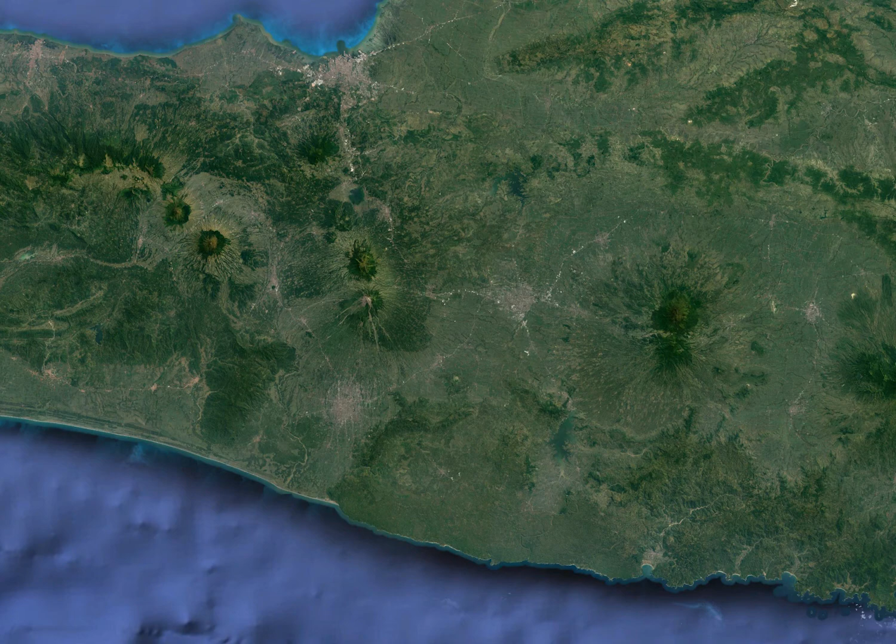Rather, the project taps into some of the fundamental challenges that planners in emerging economies are facing. If we look at Central Java, we see all the generic global urban components landing on the map - the seaports, the airports, the toll roads, etc. At the same time, Indonesia must find a way to balance development with preserving its natural, ecological and cultural landscapes.

This is a balance that's extremely difficult to achieve in rapidly growing economies. But there's another challenge. In a place like Indonesia, the traditional models of top-down planning, of centralized visions being rolled out from the capital to the furthest regions, seems to no longer work.

Instead, there's a dispersed, opportunistic urbanism taking place across the countryside, where these same global urban components, maybe at a smaller scale, are finding their way into the countryside. That type of urbanization is extremely hard to understand, map, wrap your head around, and it's even more difficult to guide and to plan for.

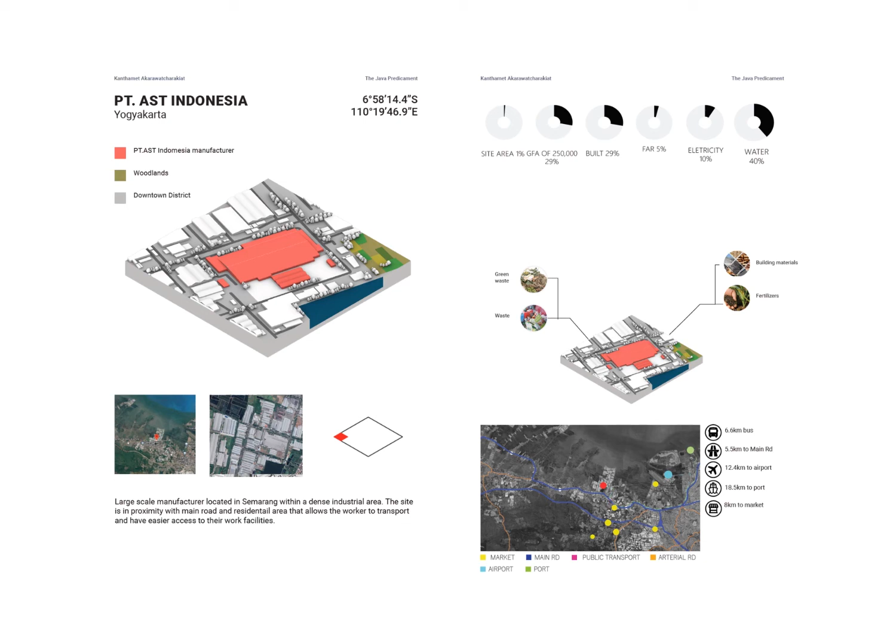So we ask students to first look at the micro level, to really map at an extremely local scale and consider what kind of processes are taking place there. That makes it very hard to conceive some sort of unified, comprehensive model.

But as we build our taxonomy of different solutions - a book of tactics and strategies that can respond to this type of dispersed growth and informal urbanization - there is some coherence. There seems to be a larger vision that can be applied to these types of environments.

The different projects relate to each other, tap into each other's findings, and work almost as a larger modular system that can be applied strategically and locally.

So the students ask a series of key questions through their projects. Is there a hybrid form of global, local, rural, metropolitan urbanism in Central Java? If so, what does it look like? How does it perform?

How will emergent forms of urbanization shape the future of Java? If these conditions do exist, how will they change, how will they grow, and how will they potentially become the predominant form of urbanism on the island? And what is the future of Java's rural-urban nexus?

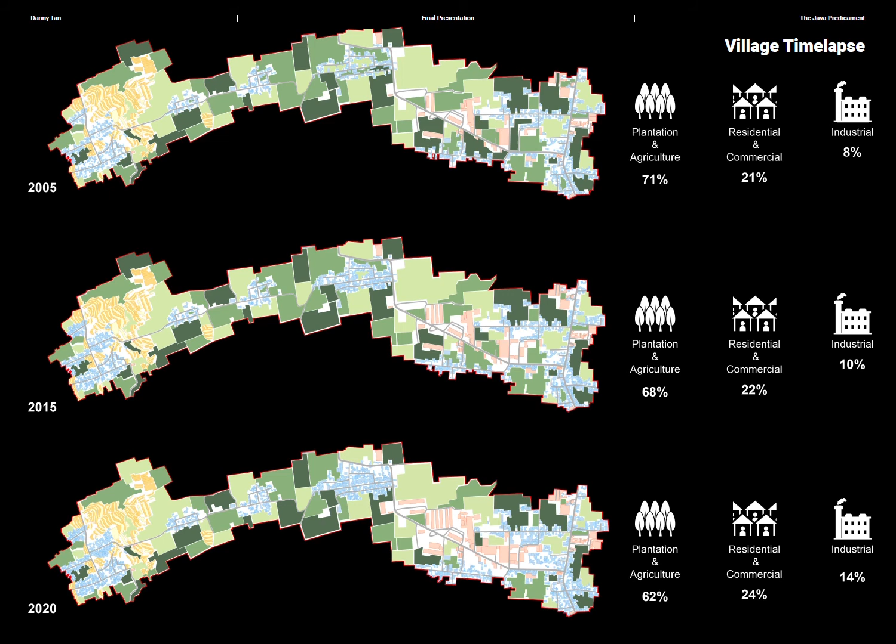In the 2045 master plan, the production sector should be formed as a dispersed production belt to adapt the local transportation network and to minimize the demolishing of the original site and maximize the developed area usage. The factory villages are identified through a series of time frames.

The factory village activates as the stretch network from major road to the inner road transportations. The stretch model delivers a diverse range of activities, and the hybrid mixed landscape forms the distribution channel of produced goods. The factory villages are constructed through different scales of transportation networks.

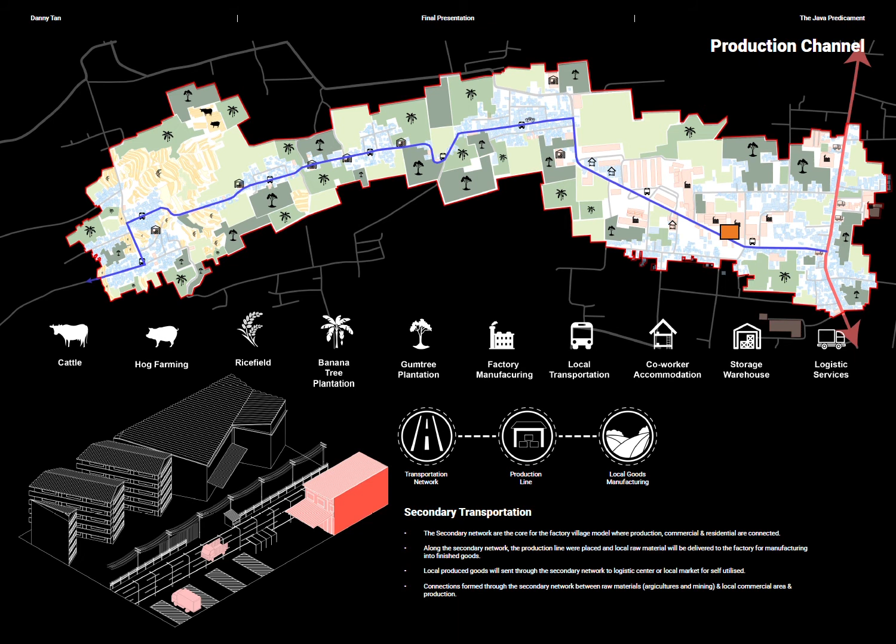Through the primary connectivities, connections were formed between the factory village and the regional networks. The secondary connectivities allow the goods to be distributed within the factory village model. Tertiary connectivity connects the local rural networks for assistance in smaller collection and distribution centers.

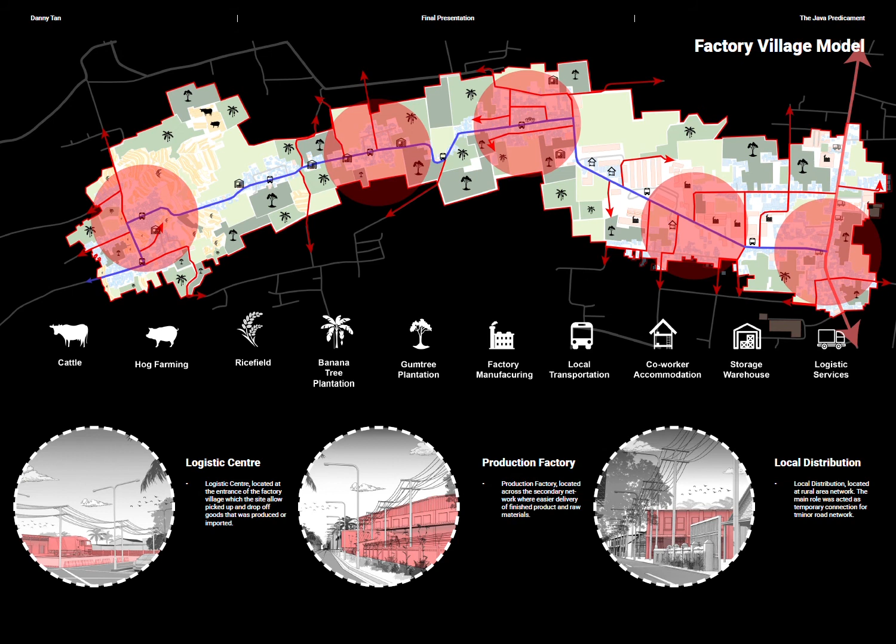Region areas will be formed based on existing local programs such as logistics centers, production factories, and local distribution centers. Logistics centers are located at the entrance of the factory village, allowing the site to pick up and drop off the goods produced throughout the factory village, and production factories are situated parallel to the secondary network for easier delivery of finished products and raw materials.

The local distribution centers are located at rural networks, where their main role acts as temporary connections of minor roads networks. As a conclusion, the factory village model is an ecology system that strives to achieve commercial activation through the dispersed methodologies of a production belt.

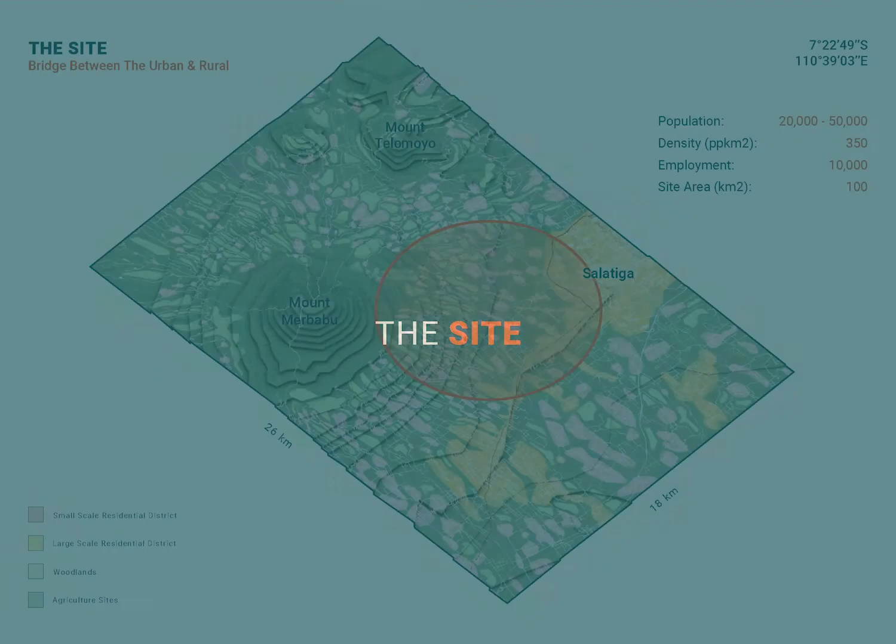This project looks to interrogate the current solid waste management and treatment industry in Indonesia, identifying its issues and proposing that the future of urbanism in Central Java revolves around waste management as its focal point, where the end is also the beginning of a city.

Waste management should be celebrated instead of being disregarded in the revitalization of the desakotas, coexisting with urban infrastructure such as public transport lines, bike lanes, and major roads to bring in additional exposure from other districts to facilitate urban growth within rural areas.

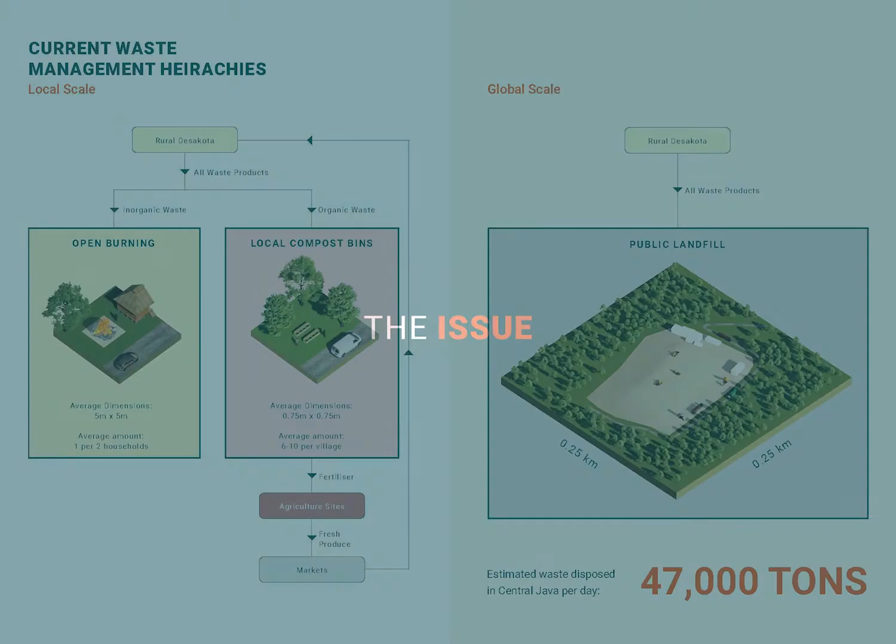I've also been fascinated by the changing of the primary paradigm of Central Java, questioning myself as to how development might happen if the driver of urban planning is through proper disposal of waste, as I am not just speculating on the project from an economical standpoint, but also very specifically on waste management itself.

This would mean that the future of Central Java is to be more community-driven and have a stronger reliance on the residents themselves, to deal with their own waste properly, with the incorporation of district waste management signifying patterns of growth for the future of these desakotas. This would ensure that the entire process is localized and incorporated into the circular economy of the district, establishing a

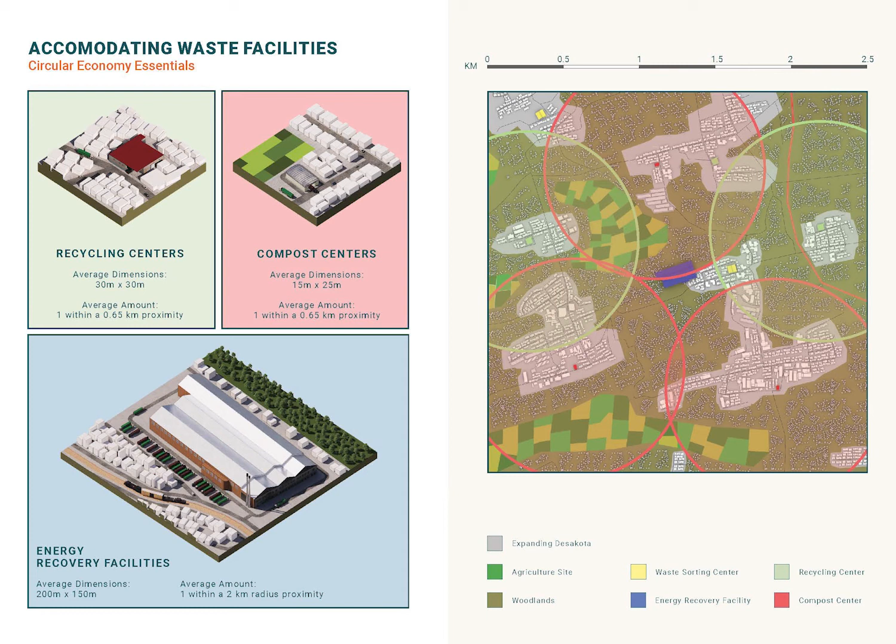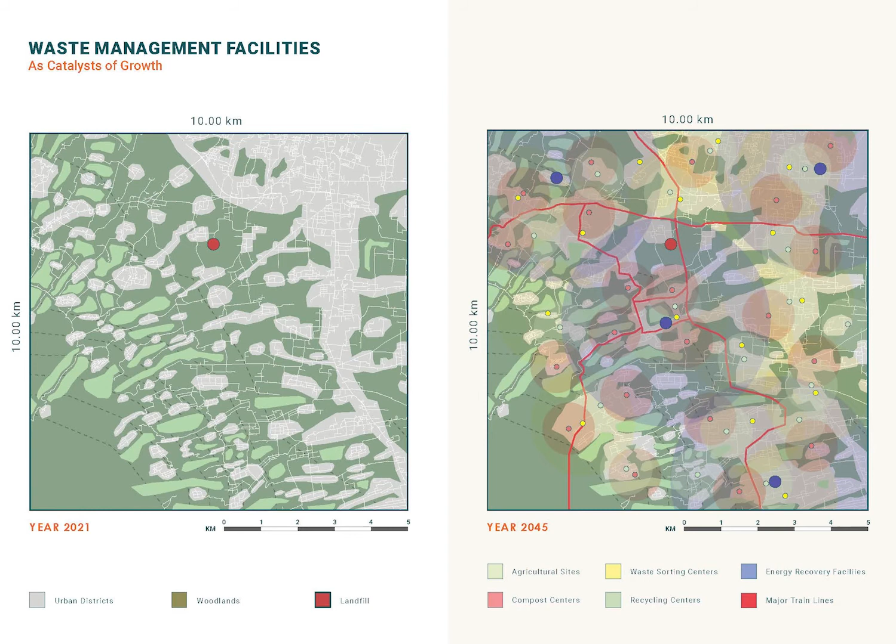continual use of resources and eliminating waste. This proposition is not just meant to revolutionize Central Java, but it could also be instilled in the urban planning of other parts of Southeast Asia or even potentially the rest of the world, starting from the installation of a waste sorting center as a transition zone that would cause a ripple effect for the implementation of other urban amenities, such as additional agriculture and farmlands, industrial and commercial districts emerging around these facilities as well, signifying an increase in efficiency for the district through close proximity and also leading to an increase in job opportunities through the consolidation of these economic hubs, creating a sustainable community that can flourish and become the future of neighborhood planning.

To virtual metropolis. My project looks to investigate the potential of growth due to information and technology in Central Java for 2045. Analyzing these sites from Central Java and making observations from the spatial conditions and consumption patterns, use of internet is seen as a pattern of connecting these virtually. It is estimated there will be 50 million new internet users in Indonesia every 5 years. Indonesia is one of the countries with the largest social media users in the world. It has been seen that with COVID-19 happening, there has been a significant increase in online activities, purchases to online education, and getting medical help.

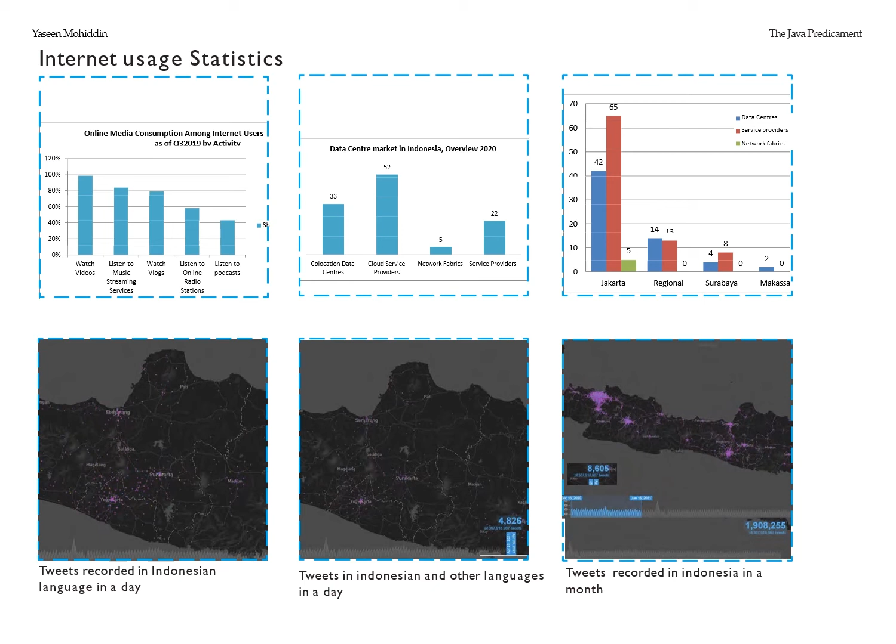I'm proposing that IT would be the facilitator in development of rural population and make them self-sufficient and independent of the urban core. Experimenting telemarketing business as one of the scenarios to be the catalyst in the development of a selected village. The virtual infrastructure would enable the desakotas to be self-sustained, and the next 25 years could see technology facilitate the growth and drive urbanization of these villages in place. Since it has been seen that infrastructure in itself does not dictate growth, the information technology, by making the services more accessible from their homes, can enable growth without the use of physical infrastructure in these circumstances.

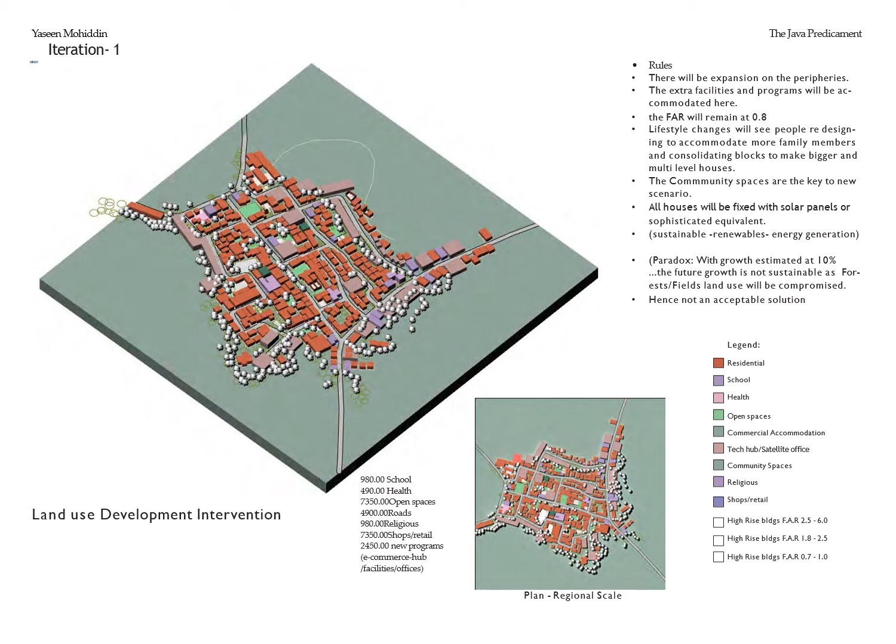The trend brought about by COVID-19 for a shift towards decentralization can also see migrants return, and the distinct entrepreneurial skills can lead to the establishment of online businesses and create models for other villages to follow. Indonesia's e-commerce sector is already growing. Success stories in Taobao villages of China suggest that digital technologies can contribute to inclusive growth. They can lower the required skill threshold, allowing individuals, including the less educated, to participate in e-commerce and earn more. Schools and community centers can also act as agencies or incubators to manage this at larger scale.

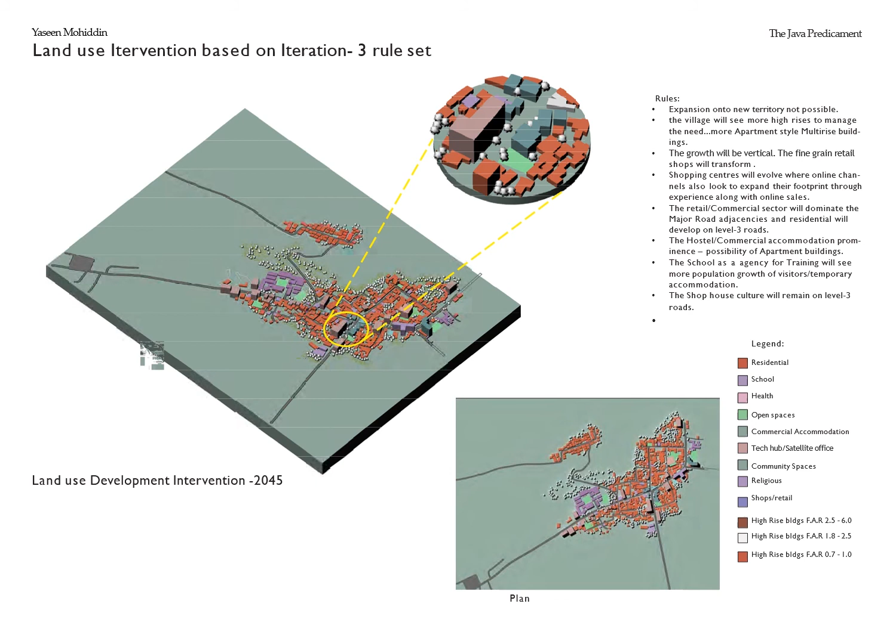The experimentation of these different scenarios and options reinforce the proposal. The development in terms of shift in programs to shift in typologies has been projected. The development could maintain the village culture and hybrid of fine-grained existing scale built form along with clusters of new multi-level buildings. Biophilic facades, eco-friendly sustainable homes, ground floor retail, and more community gathering spaces will not only enhance a sense of community, but can be viewed as a prototype for other villages to follow.

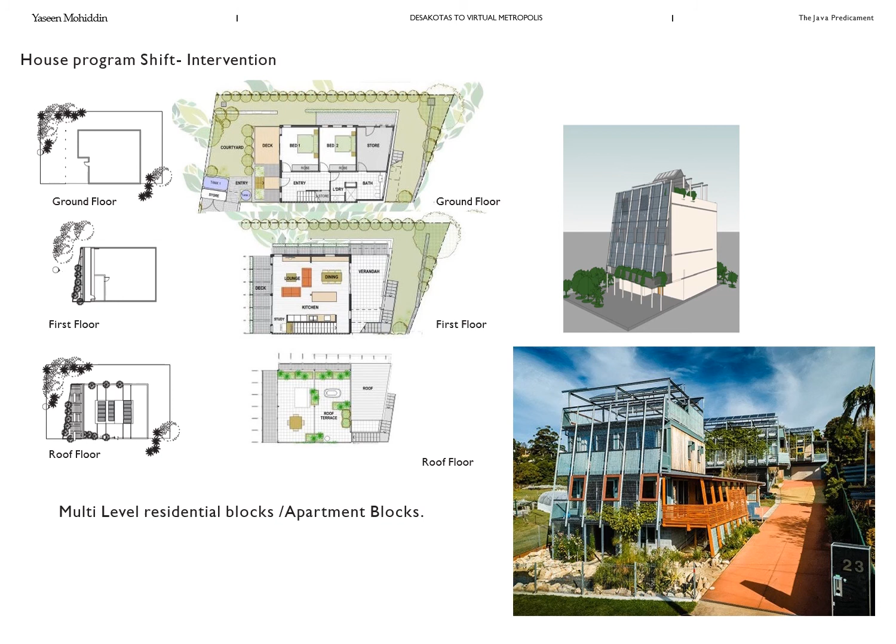The desakotas as a good unit of urbanism, closely connected to the community and virtually connected to the whole world. These also being self-sufficient with jobs, entertainment, online services, and shopping, etc., and independent of the urban centers for economic reasons, it has every potential to transform into a virtual metropolis.

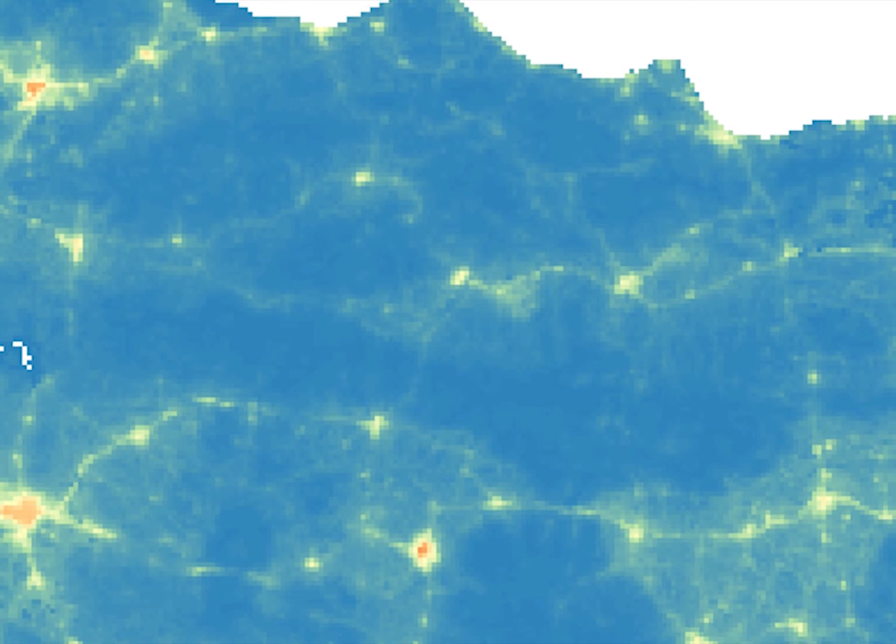The notion of urban catalyst refers to the new element that can promote urban changes and accelerate or change the speed of urban development and constructions. That is to say, through the intervention of certain elements, a certain chain reaction can be triggered to promote the maturity of objective conditions for urban constructions, so as to promote the sustainable and gradual development of the city according

to the people's will. In the development process of Central Java cities, excessive accumulation leads to environmental degradation, traffic congestion, and other problems, which makes the population and other factors tend to develop in suburbs or small towns with better conditions or more abandoned spaces. This is the anti-urbanization background of Central Java.

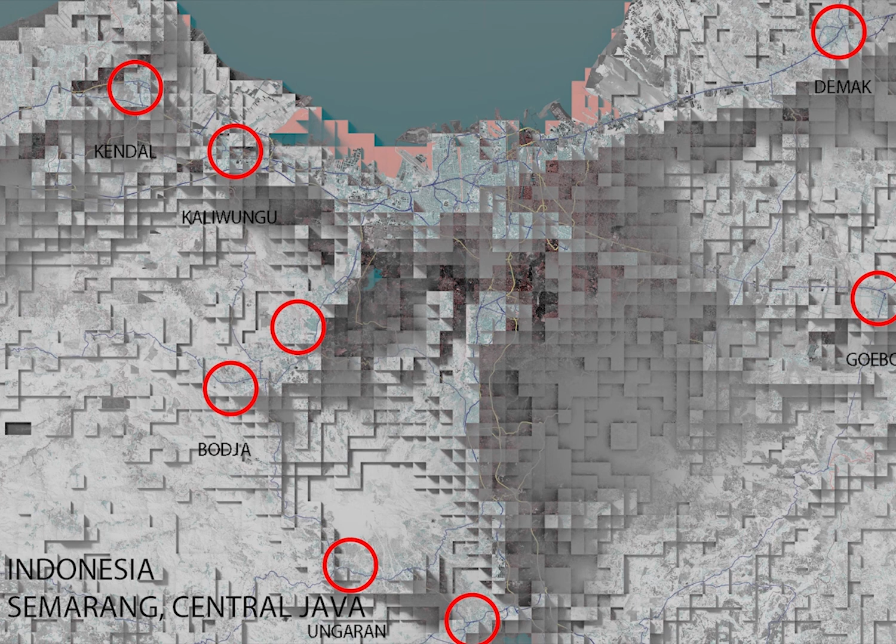This is a summary of one of the big cities in Central Java. If you cover the population density map with it, you will get the following results. Due to the terrain, traffic, and other factors, the population density within each red circle is higher than that of surrounding areas. If we understand it from a different angle, it will be much more clear. And in every high density population point, there is a system that can digest most of the needs of the public, and it can form a closed loop of self-supply chain.

When we zoom into one of the high density population points, after 25 years the population density will reach 2.2 times, and the function of a market will become limited and difficult to control.

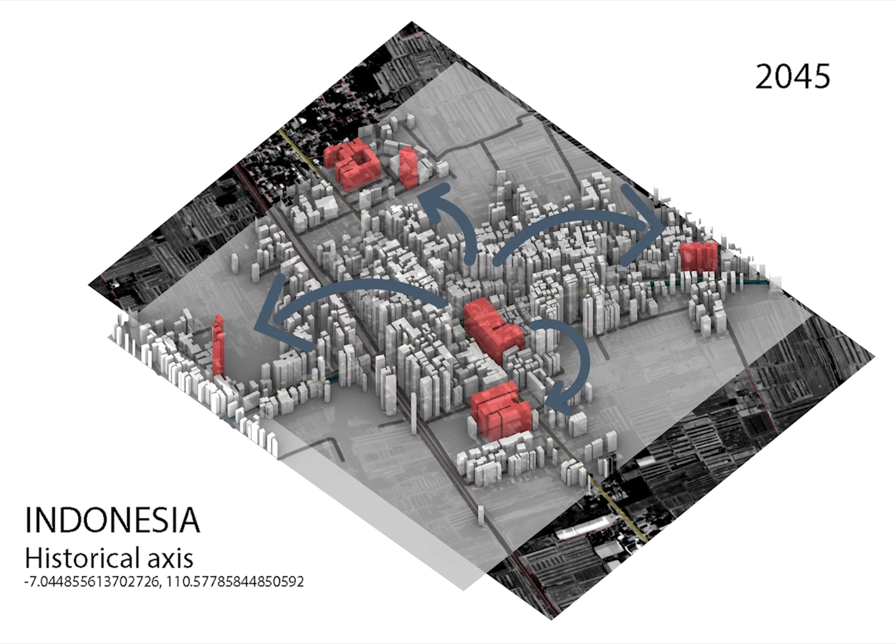As a solution, I hope to break up the rules of regional center and get such results. Each red area serves as one of the catalysts in the area. The proposal is to stimulate and drive the construction of the city and promote sustainable, gradual development of urban structures through such urban catalysts.

It is not the ultimate product. It is the beginning of a series of products which will stimulate and guide the development of many subsequent projects.

Each element catalyzes definitive action of protection from risk and disasters, generates economy, enables intangible boundaries which form one community, and come together to celebrate in 2045, with economy booming to 4 times through fruit tree plantation with 10 trees per family.

The increase in tree cover prevents or obstructs the disaster from volcano, increases groundwater table, reduces the effect of siltation, and protects the land. The communities of Central Java have proven that increased tree cover can surge rice harvest to 3 cycles per year as compared to 1 harvest.

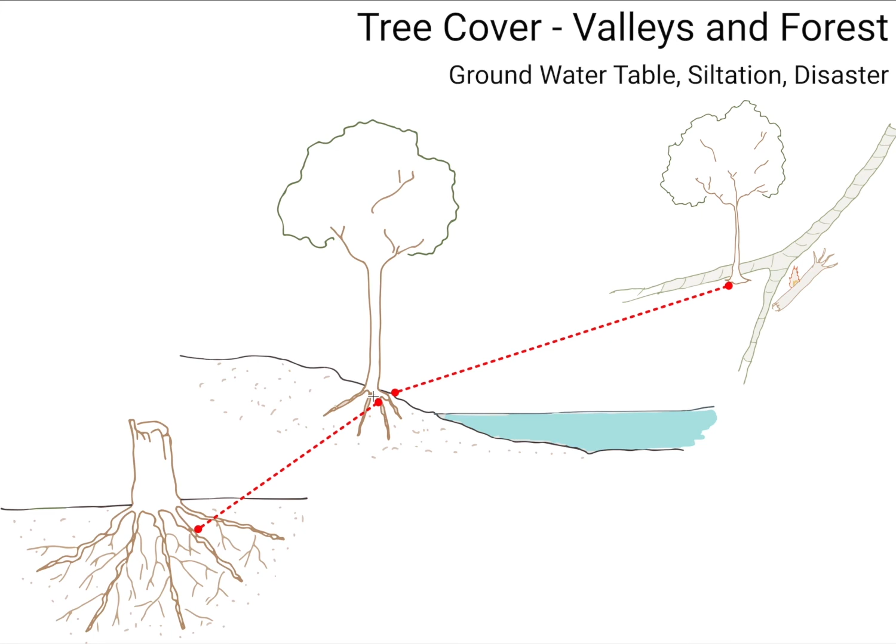The risk and disaster helps understand the existence of each element in the system. The analysis at macroscale aids the understanding of interrelation among local programs and consolidation of communities, which enable densification in initiating local connection and growth.

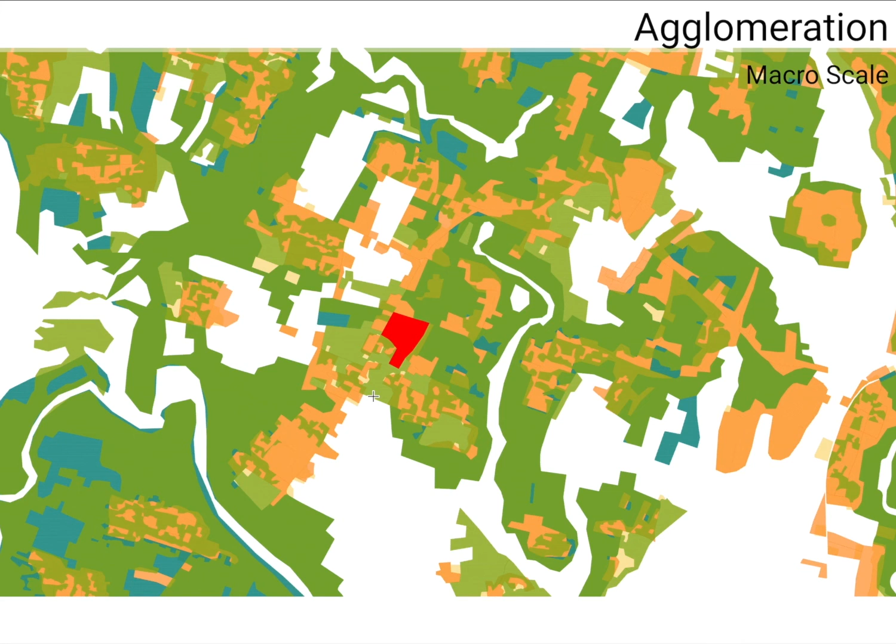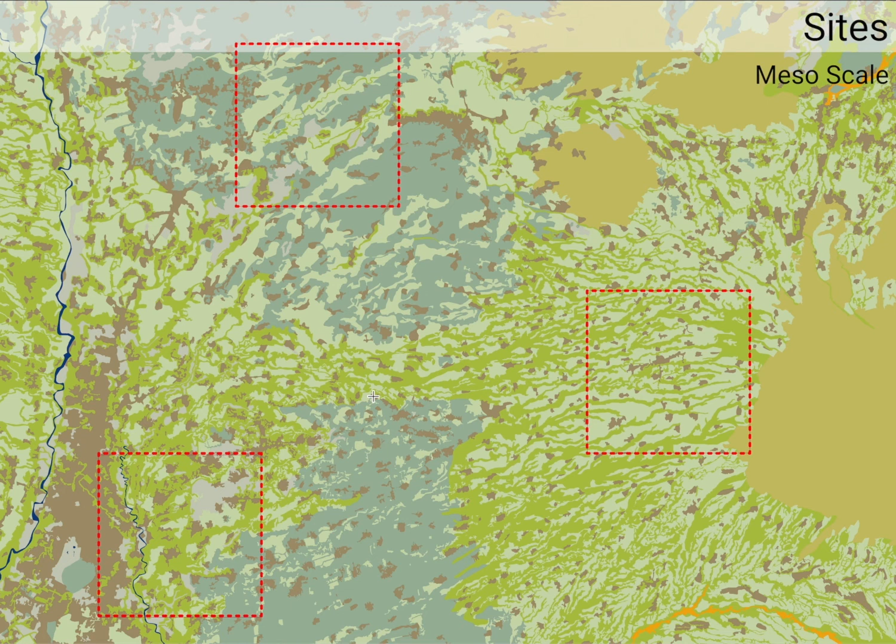At macroscale, the negotiations that take place in the hybrid landscape allow densified communities to agglomerate, sharing their relationship with tree cover in green and farms in white as principal source of economy. The analysis formed the basis of application at mesoscale to ensure that the system is not intervened. On the contrary, it further enhances the outcome while strengthening sustenance and resilience.

Site 1 is close to the volcano and utilizes the valley system principally. Site 2 is close to Magelang, the rural-urban fabric. Site 3 has a narrow and dry stream which needs to be converted to a valley.

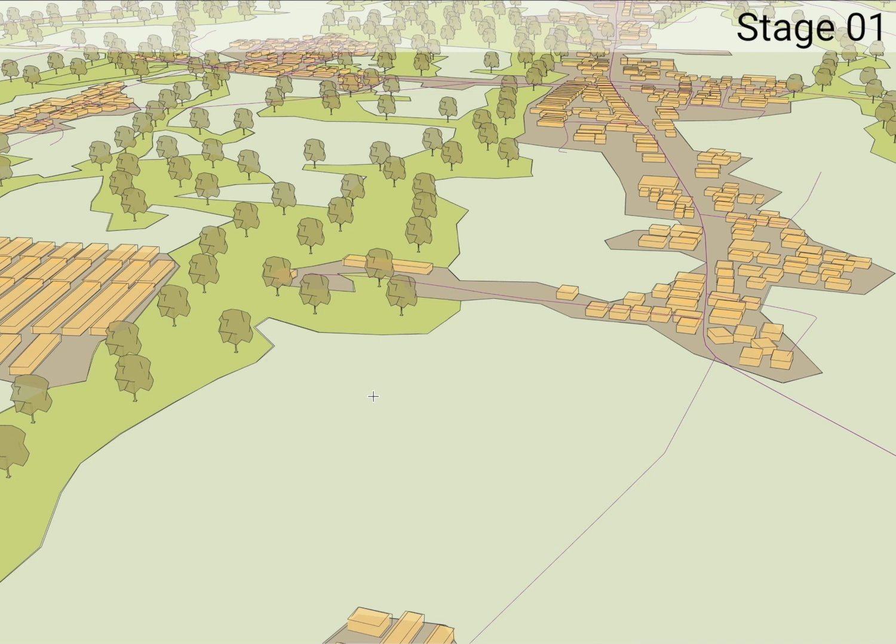Development stages for the sites can be understood in 4 progressions, in which stage 1 is the existing scenario of fragmented negotiations; stage 2, the meso scale implication, a 45% increase in tree cover to renegotiate economic program; stage 3, corridors of growth, densification of nearby communities as understanding developed from macro scale; stage 4, consolidation of land area by increasing volume while accounting for the lost trees in corridors of growth.

This has been applied at all 3 sites, 2045 as per fragmented negotiations. Thank you.

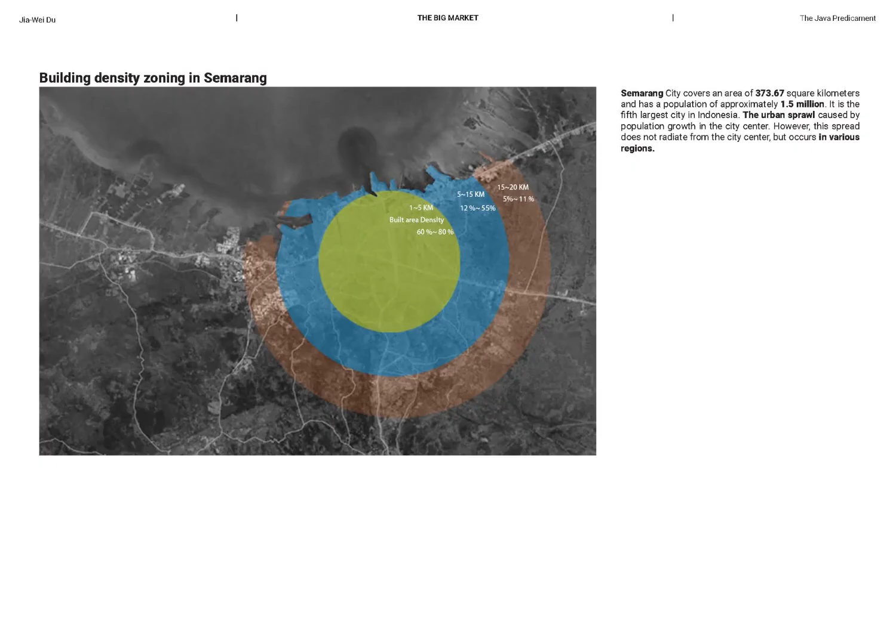Hi, I'm Jia-Wei Du. My project is the Big Market 2045. A large additional market will be built around the Semarang city to slow down the city sprawl. The phenomena of spreading around the city, mostly near university or industrial areas—these infrastructures affect the urban fringe and gradually create several new communities.

So the urban sprawl does not come from the city center, but occurs on the border of different administrative regions. I searched some low density areas to create an edge between districts. This area, because of the establishment of the industrial area, the nearby residential area gradually expanded and became a new community.

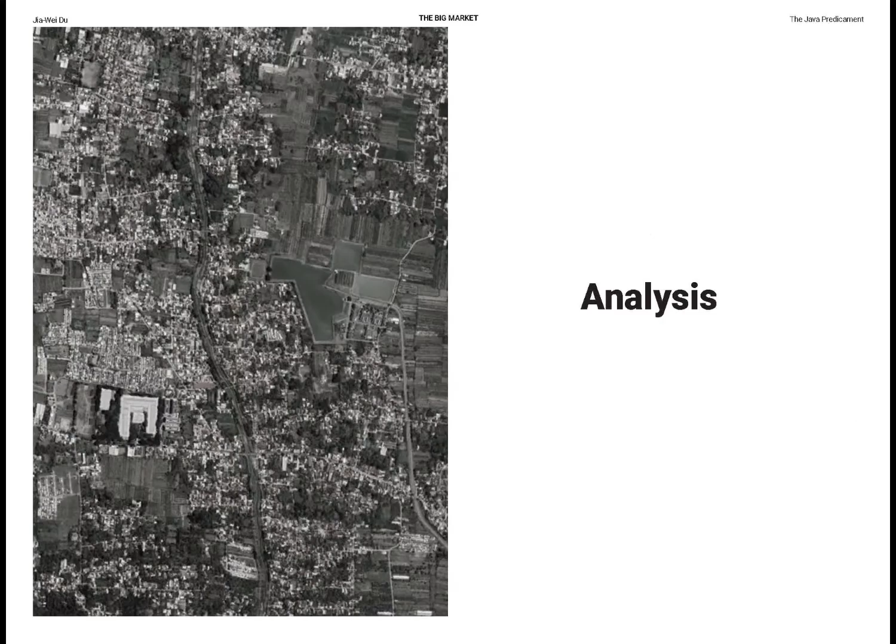In 2015, there was a traditional market here. I think this is an opportunity if the traditional market continues to expand. What impact will that have?

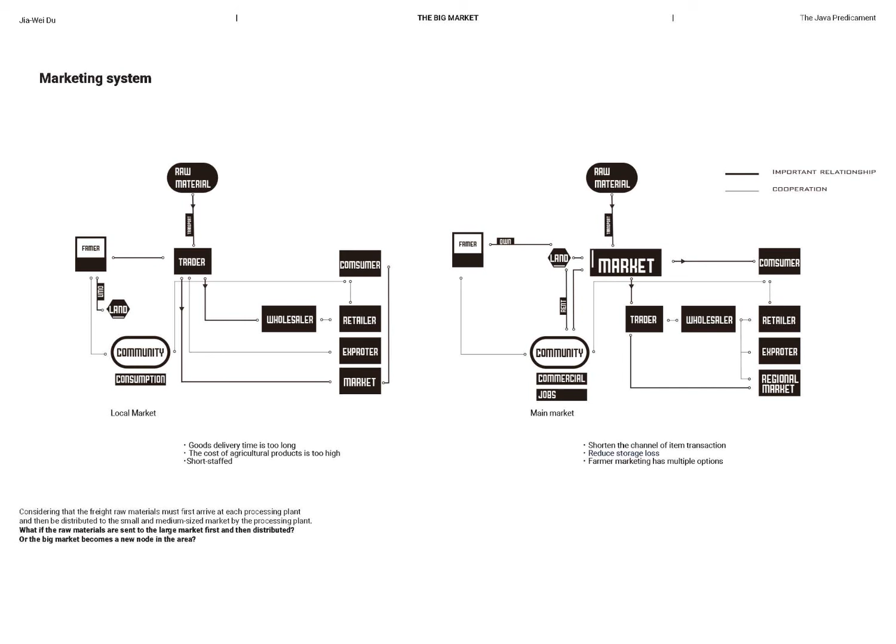Compared with the traditional marketing system, in the local market most imported goods are transported and sold to the market by traders. After becoming a central market, the market can directly collect and store raw material and goods. This can shorten the channel of goods transportation for the community. It also brings a lot of work and consumption opportunities.

Assuming the number of merchants in 2045 is more than 6,500 due to increasing demand, the agricultural land near the collection and storage center can conveniently provide goods and material to the traditional markets in the urban area.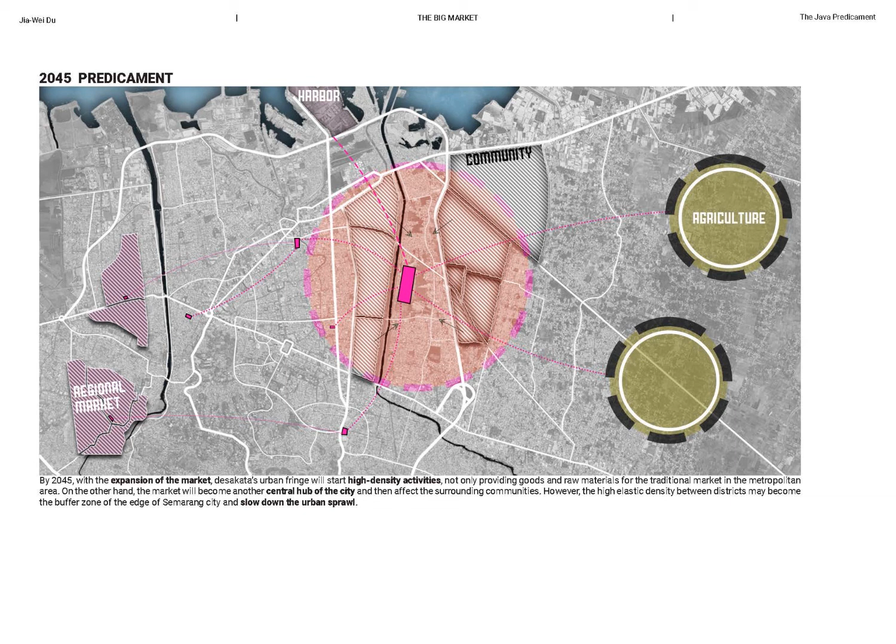In 2045, the market will become another central hub of the city, affecting surrounding communities. However, the higher density between regions may become the buffer zone on the edge of Semarang city.

Central Java remains in increasing urban-rural disparities. Due to Indonesia's own policies, which tend to pay more attention to industrial development instead of agricultural development, this area faces a predicament that the development of rural areas is relatively backward.

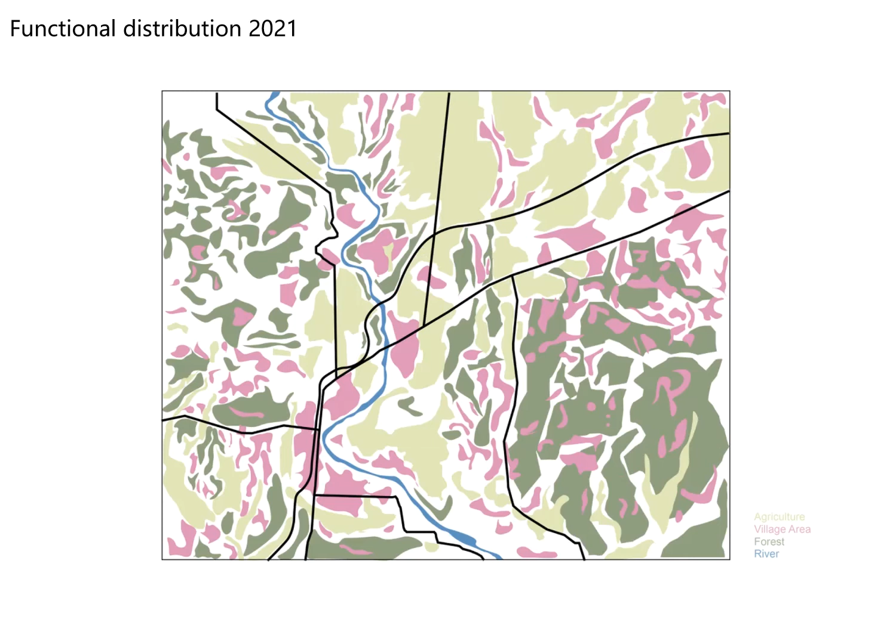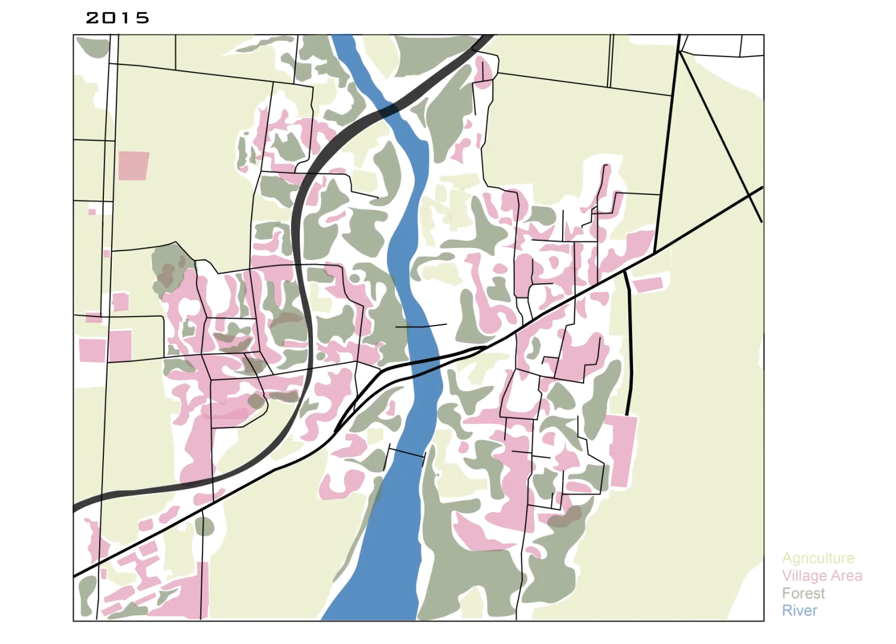Besides, the Indonesian government's policy of encouraging decentralized planning has contributed to the current urban function distribution model, which enables people to get all the functional needs of daily life in a very small range. However, it relatively affects the motion of the entire regional economic and industrial chain. As a result, there are few locally specific industrial chains, and crops are not only unable to be exported, but even need to be acquired through imports.

This predicament and problems exist along with opportunities. With its good natural environment and abundant labor force because of its large population, Central Java still has great potential for agricultural development.

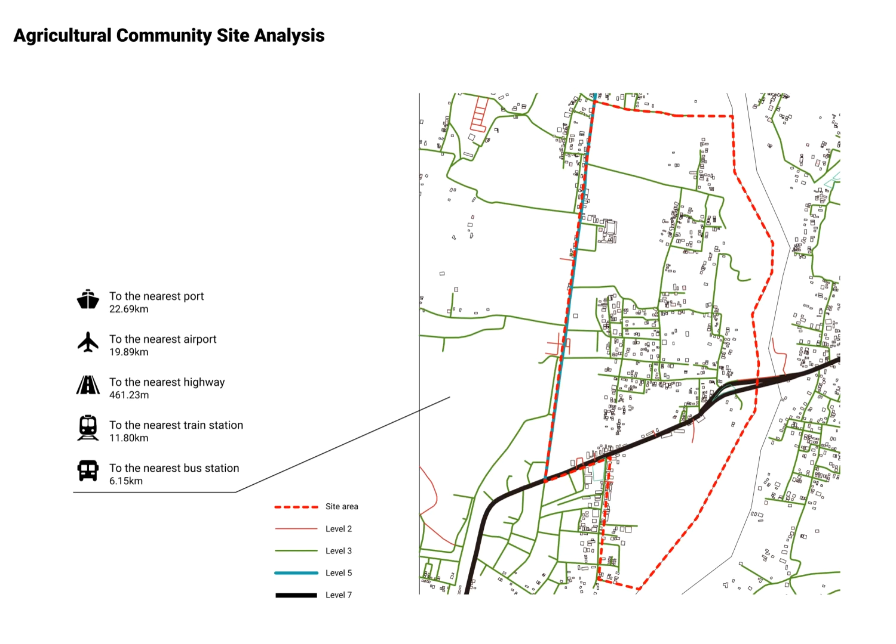Finally, we selected two small villages with a river located at the southwestern area of Yogyakarta as our experimental area and implemented our idea. We regarded the whole village as a system with different functional hubs and integrated small farmland into large farms. Through overall regulation and control, planting and harvest could be carried out in a unified way.

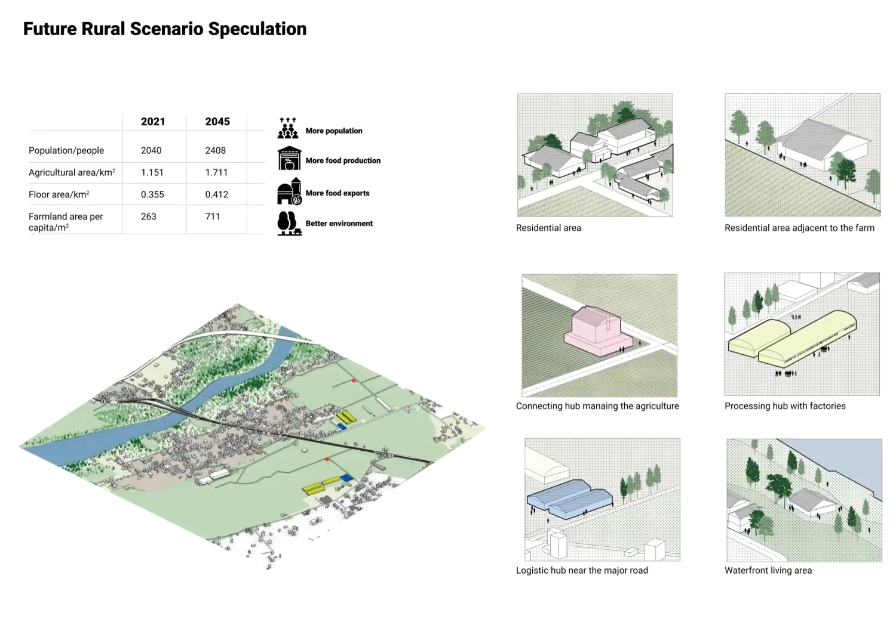This system also includes the management and reuse of waste and wastewater, so as to lay the foundation for the sustainable development of this region in the future.

Urban agriculture can be reimagined in 2045 in Java, where it is inspired by the coexistence of desakota and urbanization that is currently happening in Java. With rapid urbanization, the villages of desakota are decreasing, and the food supply chains are becoming longer, causing unsustainable planning.

However, with the implementation of sustainable farmland in potential urbanized areas, this helps stimulate self-sufficiency for farmers and maintain the villages of desakota through Java. Throughout the speculation and comparison of local and global agricultural typologies, these typologies have been expanded into further potential hybrid conditions for urban agriculture with strategies from production, food hub, and creating market and trade.

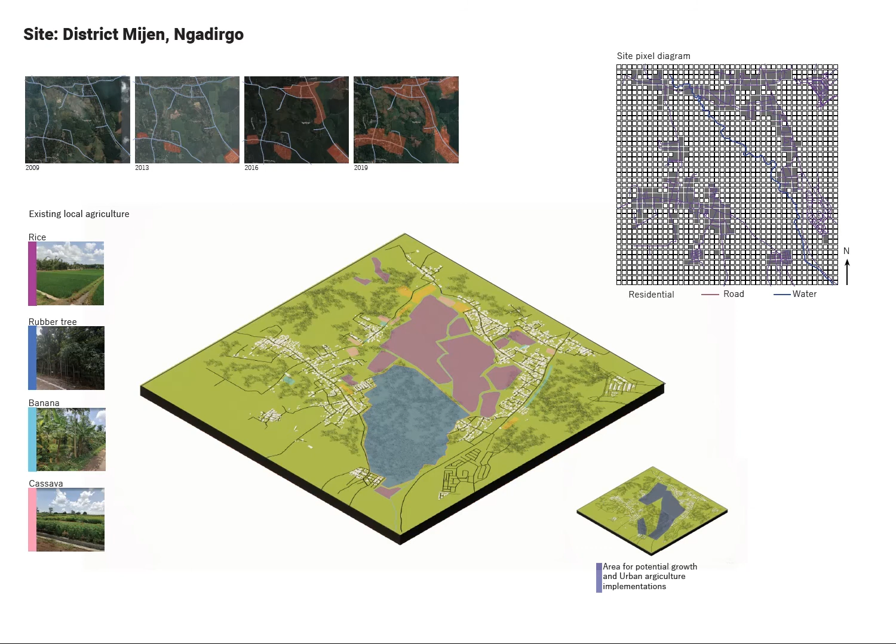The chosen site is Ngadirgo in Mijen district, the main area for agricultural production that is close to Semarang city. Due to its low land price and accessibility to irrigation, this site has potential to develop the area into urban agriculture, maintaining the desakota before urbanization takes over.

First strategy: the idea of production is to diversify crops to create biodiversity within the area through a land configuration of 2 acres that will create self-sufficient farming. This land configuration is also catered towards urbanization of growing population and to create housing for farmers. This implementation of self-sustained farmland won't disturb the existing agricultural context.

Next, food hub. The food hub acts as a processing hub and aims to stimulate the local economy and provide jobs for local people by pulling small and medium-sized farmers together so they can pool their products to fuel larger demand. This will help farmers cut away the middleman problem.

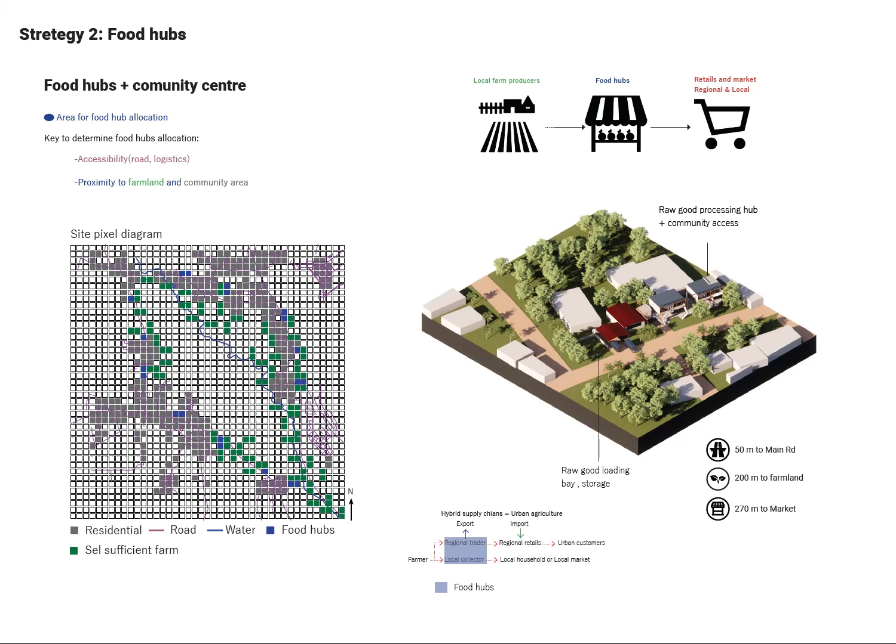Next is market and trade. Market and trade will be prioritized in urbanized areas that are accessible for locals.

So what will happen in 2045? The allocation of self-sustained farmland will act as a buffer to protect the existing farmland from urbanization, which will prioritize the existing farmland to be the production area for the community, making food more accessible and affordable within the area. The configuration of this will create biodiversity in the context too.

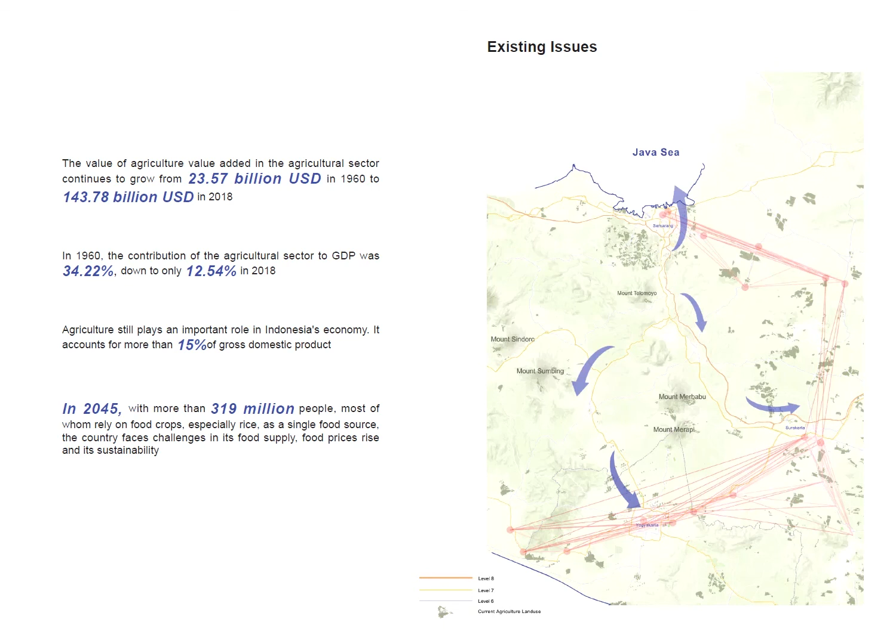The existing issues in general are decrease of rice fields, land with no farmers, low agricultural technology, and poor infrastructure. My proposal basically aims at creating developed centers in productive or potential productive rural areas and maybe revolutionizing rural areas.

Connecting them together to form their own towns, like agricultural-based small towns. The centers are to become the focal points for the collection, processing, and distribution of agricultural inputs of the surrounding rural areas. The whole proposal is based on the ecosystem to develop further.

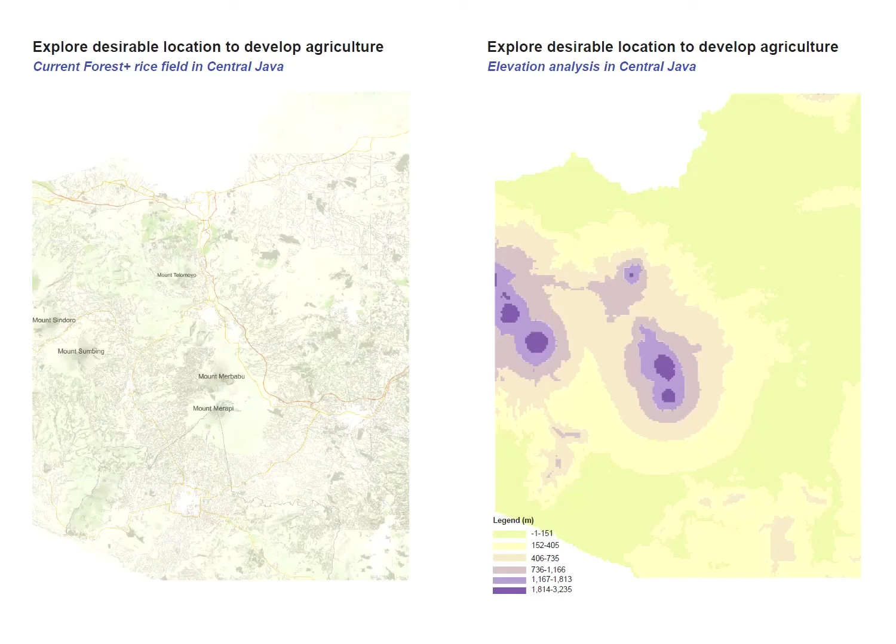The next step is to explore desirable locations to develop agriculture and test them. Then I focus on the aquaponic system, the fish-vegetable symbiosis system using a recycling process to grow and harvest plants, as well as farming fish, where fish waste works with gravel and beneficial bacteria from the plants to create a recyclable concentrated compost.

Wastewater is pumped from the fish to the upper gravel layer, where bacteria can break down the impurities, leaving the nutrition and essential nutrients for plants. Crop residue is fed to livestock and fish. The water cycle of agricultural production provides local produce, reduces environmental pollution, and ensures economic gains.

In 2045, a range of community and agricultural programs are distributed within the site, so that each person has easy access to those buildings in less than 6 minutes on foot. This also allows existing farmers to continue working the land while satisfying the needs of local people to achieve self-sufficiency.

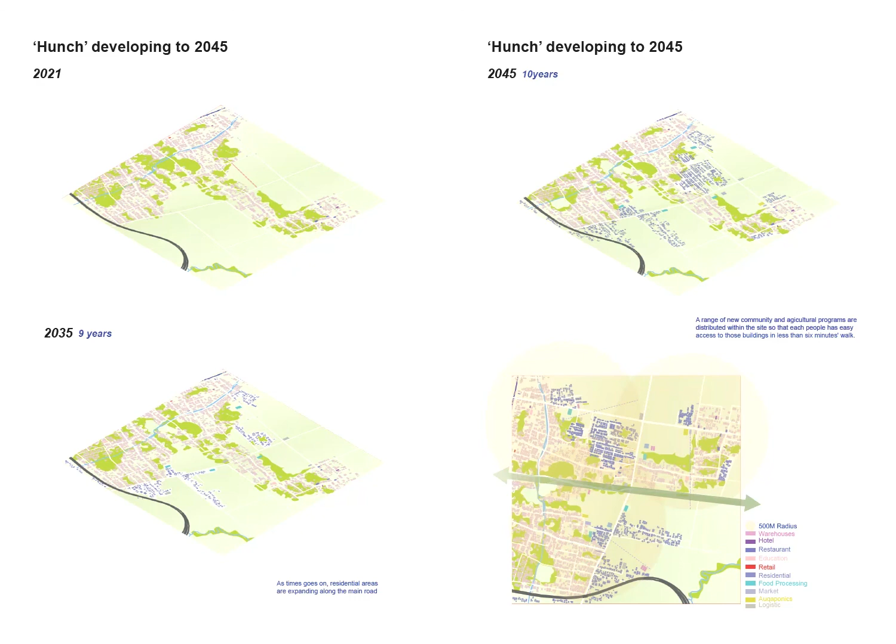Surplus of production will be distributed to other regions within the country. The next is the vision of people's lives in the future.

This project provides a detailed analysis of how a regional road system affects the development of the area. The diversity of the road system at a site is directly proportional to the diversity of surrounding buildings.

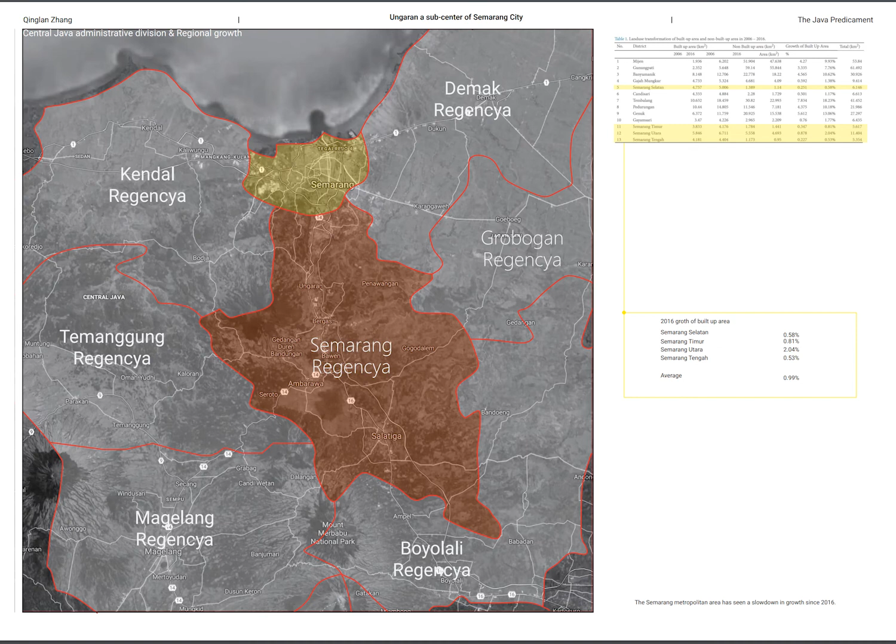Based on the existing road system in Central Java, Ungaran is likely to become a subcenter of Semarang City. This hunch is based on geographic location, land price, and existing land use.

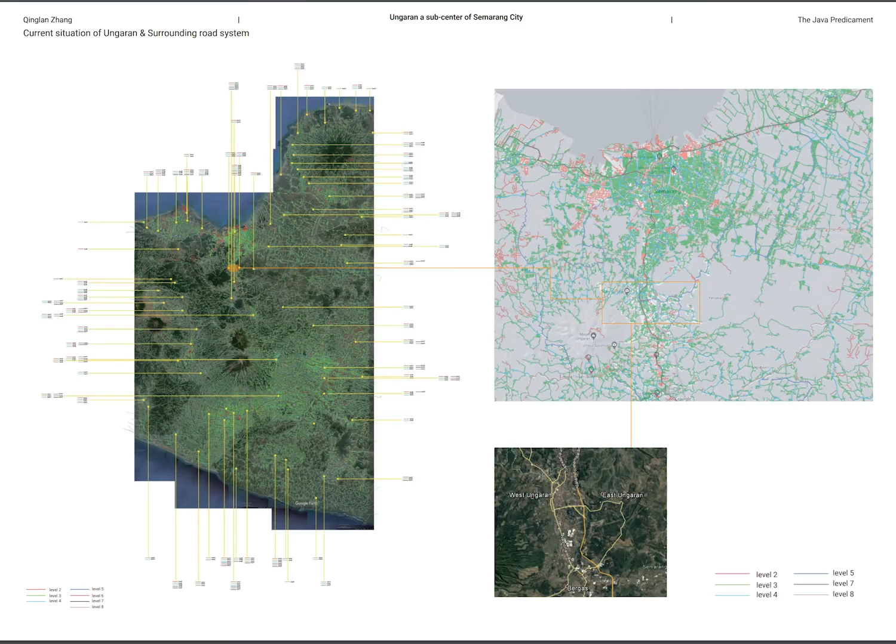To control costs and maintain a good geographic location environment, some factories originally in Semarang may be moved to Ungaran. The existing factory areas are likely to be expanded into industry parks, and corresponding residential and trade areas will appear around the industry parks.

The establishment of higher education institutions will also help the construction and development of surrounding areas while expanding themselves.

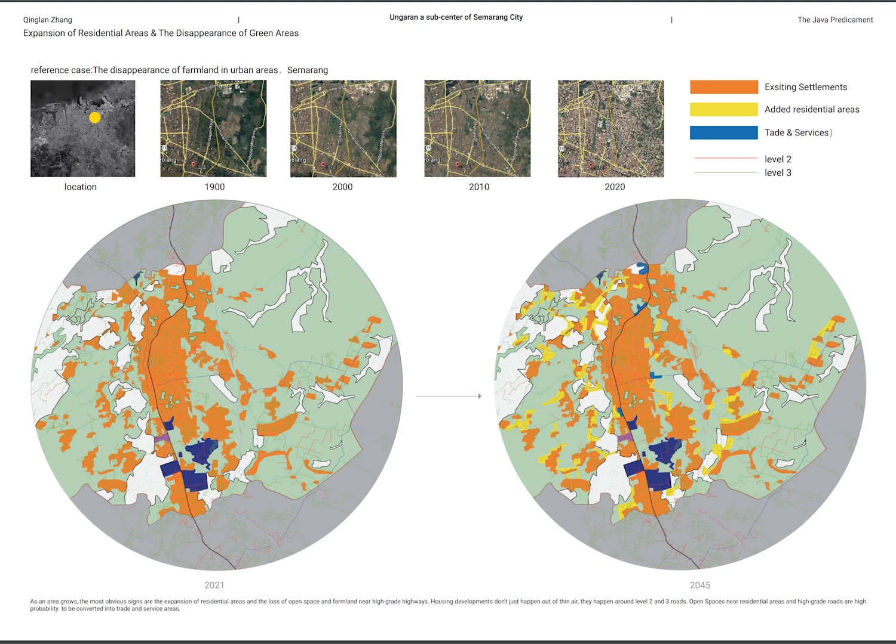Then, most obviously, the farmland near high-grade roads, especially national roads, will be replaced by new residential areas. Furthermore, existing residential buildings will also spread out according to the road system, and open space nearby the high-grade roads and residential areas will be largely developed into trade and services areas.

All these factors will increase economic development in Ungaran and attract people from surrounding cities to move in, thus promoting Ungaran into a new subcenter of Semarang City.

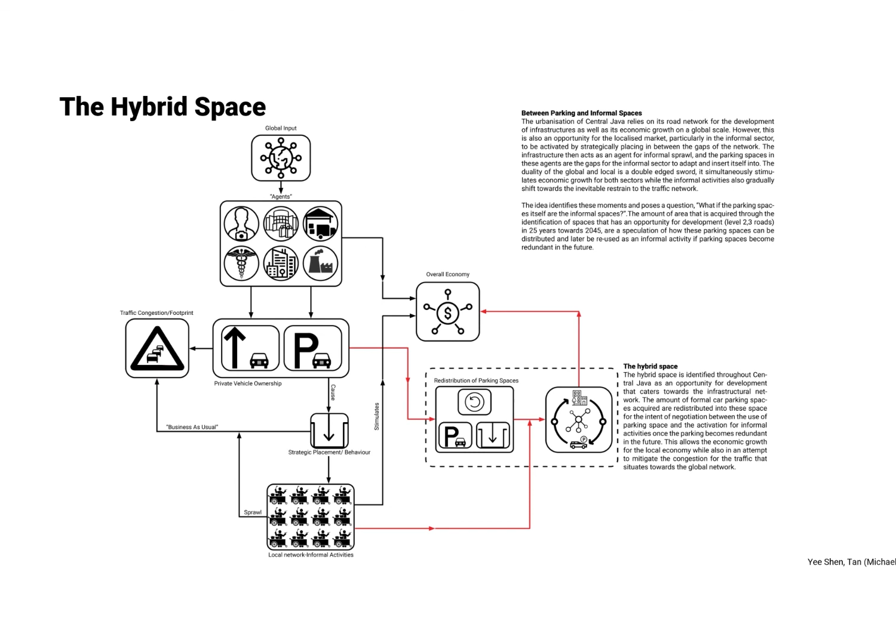The hybrid space ties in the relationship between car park space and informal activities. It is identified throughout Central Java as an opportunity for development that caters towards the infrastructural network.

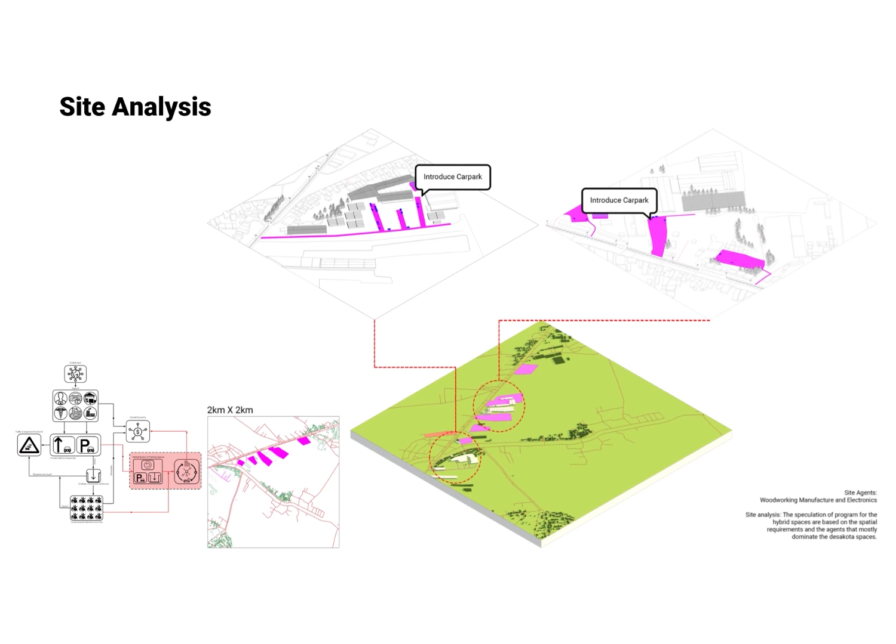The idea is based on acquiring car park spaces found in the global infrastructures and then redistributing them into other spaces, for the intent of negotiation between the use of parking and activation for informal activities, should parking become redundant in the future.

Similar parking patterns dictate how informal spaces are activated around the urban fabric, as Central Java relies on its road network for the development of infrastructures as well as its economic growth on the global scale.

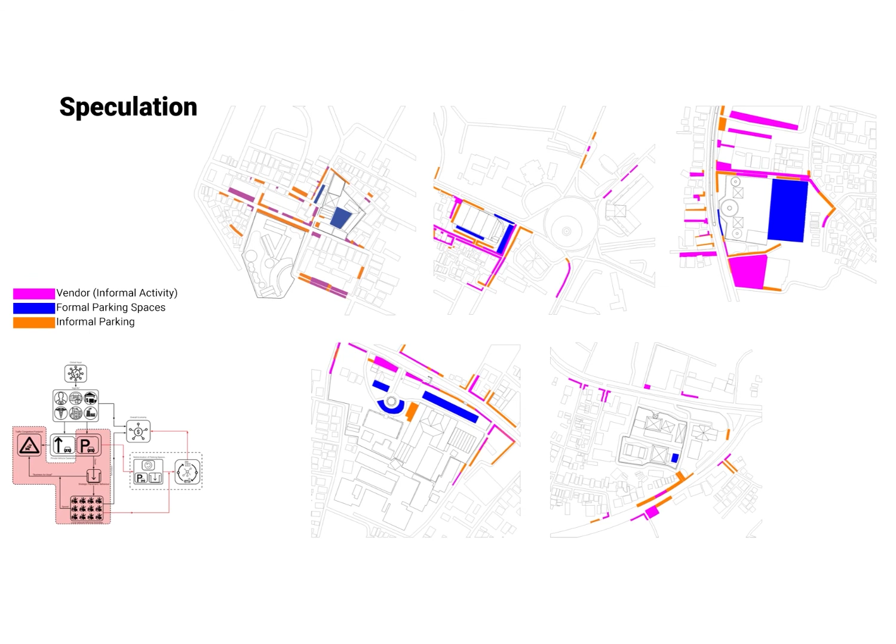The duality of global and local inputs is a double-edged sword. It simultaneously stimulates economic growth for both sectors, while informal activities also gradually shift towards the inevitable restraint of the traffic network. It poses a question: what if the parking spaces themselves are the informal space?

By identifying a spectrum of spatial qualities found in the road network, it enables the parking spaces within the infrastructures to be siphoned out and placed in order to allow economic growth for the local economy, while also mitigating congestion for the traffic network.

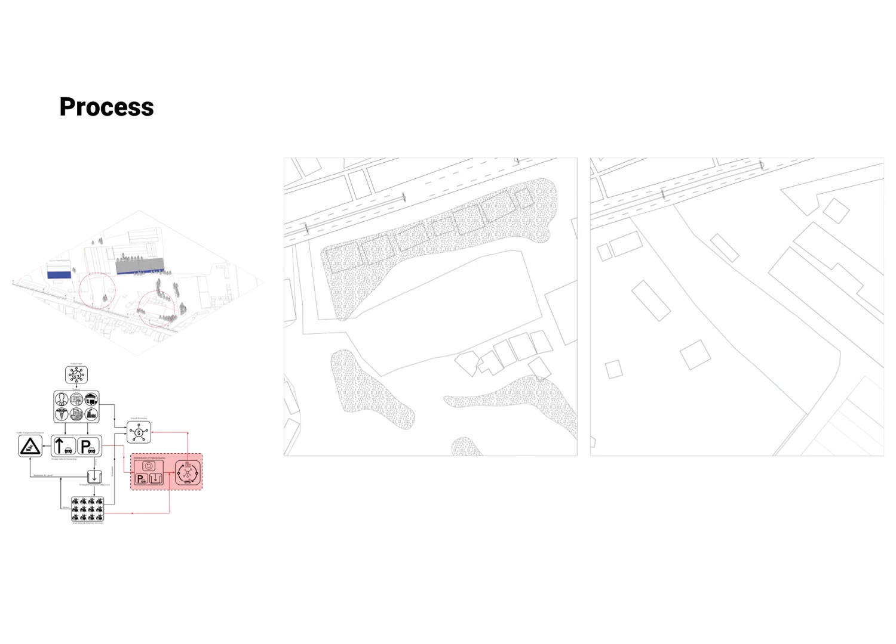As the idea begins to take place, methods of subdivision are then able to occur in order to fully utilize the space for planned parking, based on a minimum standard for transitional car flow.

The parking spaces are then used as a benchmark for the transition towards informal spaces as years go by, ensuring the transition takes place while retaining vehicle circulation within the site.

Little gestures can then come into play as elements that structure the parking spaces are further developed, to help spatially orientate and engage between the informal activities and their surrounding context.

This is an attempt to create an opportunity for the less fortunate in society to hold their ground within Central Java's network. Thank you.

Our goal is to control the carbon emissions of Central Java in the next 25 years. In order to achieve the goal, we mainly focus on two parts. The first part is about the green space.

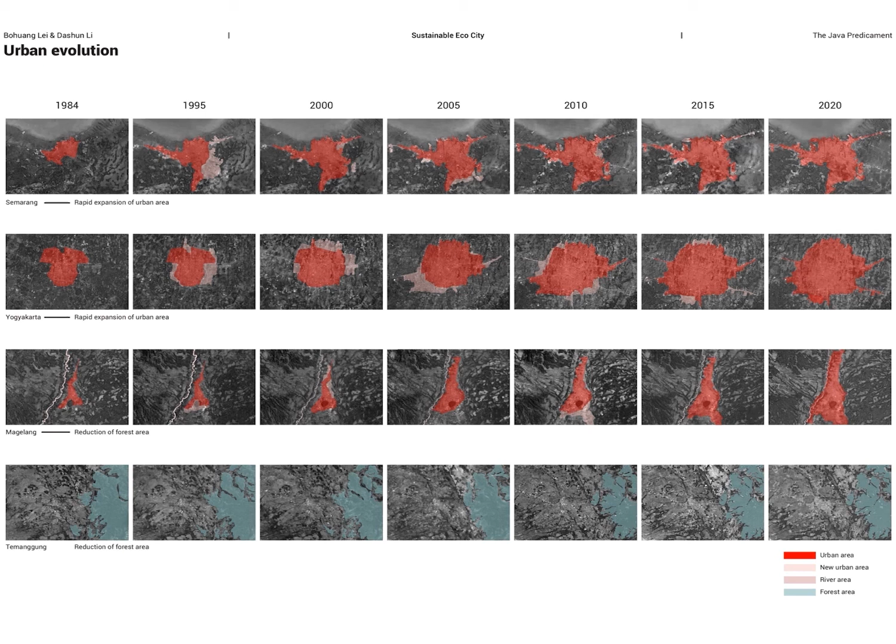We chose different cities to do the research. By studying the development of the cities, the types of green space, and the ecological structure of the site, we found that the scale of green space in Central Java is reducing, and the function of the green space is single, which brings other disasters such as flooding.

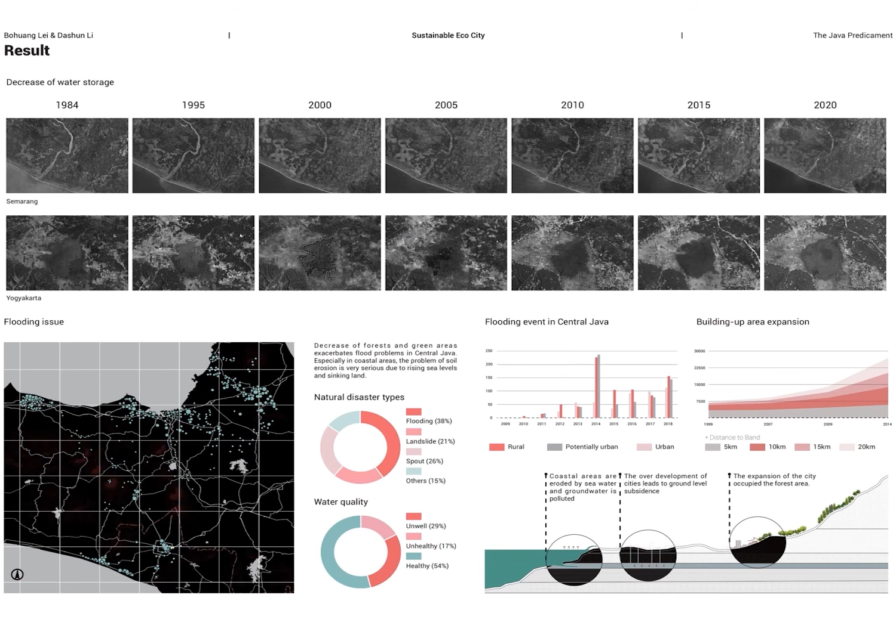Another part is the energy structure of Central Java. Through research, we found that Central Java needs to develop more energy sources to replace fossil energy, such as solar energy and bioenergy.

Therefore, we provide different solutions for the two aspects. On one hand, we have predicted and calculated the required green area for reforestation in the next 25 years. We also provide reforestation schemes at different scales.

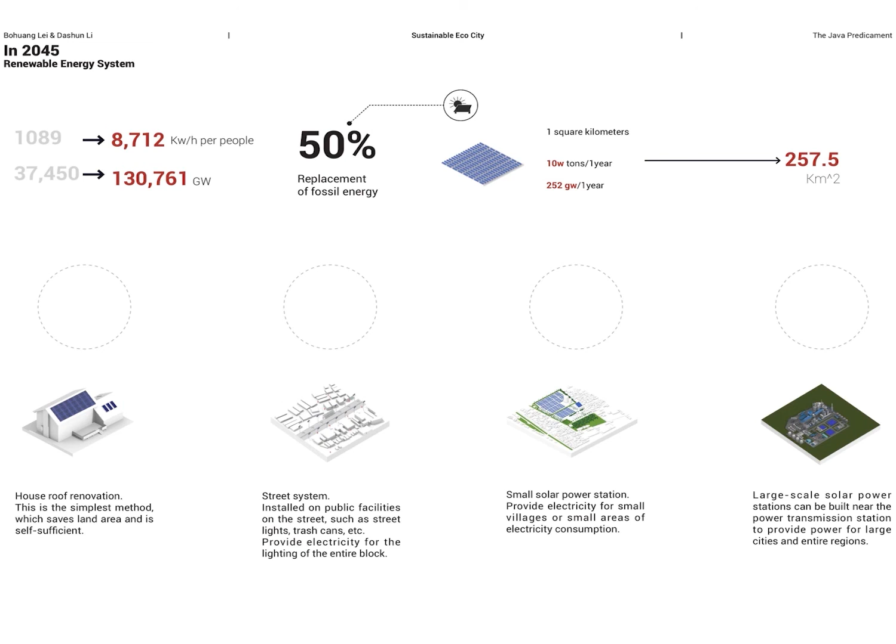On the other hand, for solar energy, we have calculated the solar power plants needed in the next 25 years. We have also provided solar energy solutions for different areas.

So this is Central Java in 2045 under our scheme. We found that with green space of different scales and functions, as well as different types of renewable energy, Central Java will become a sustainable eco-city in the next 25 years.

Hi, today we will talk about our design strategy for 2045 Central Java eco-traveling loops. Our design strategy wants to establish eco-traveling loops in efficient routes. Central Java has good natural resources. Our projects want to achieve both ecological and environmental protection and economic development.

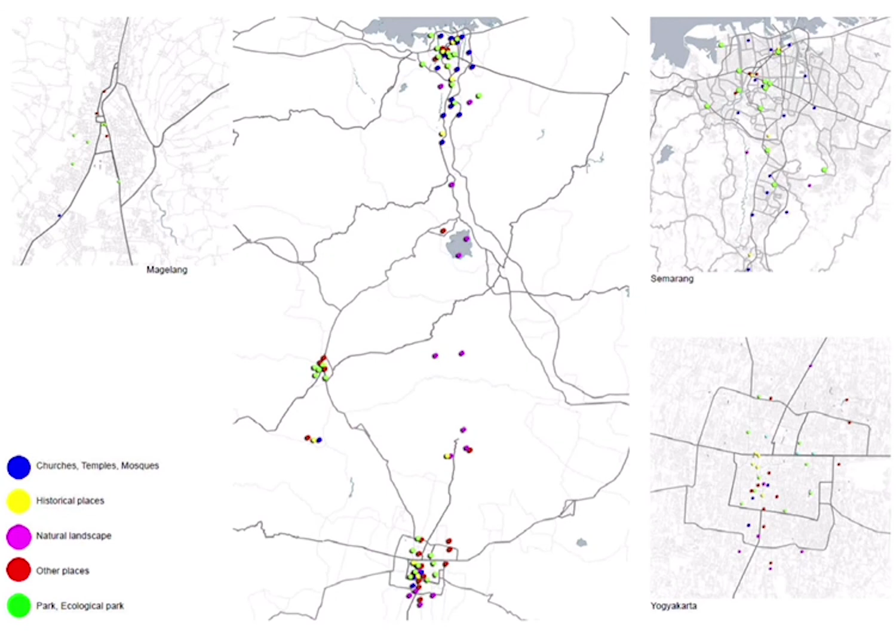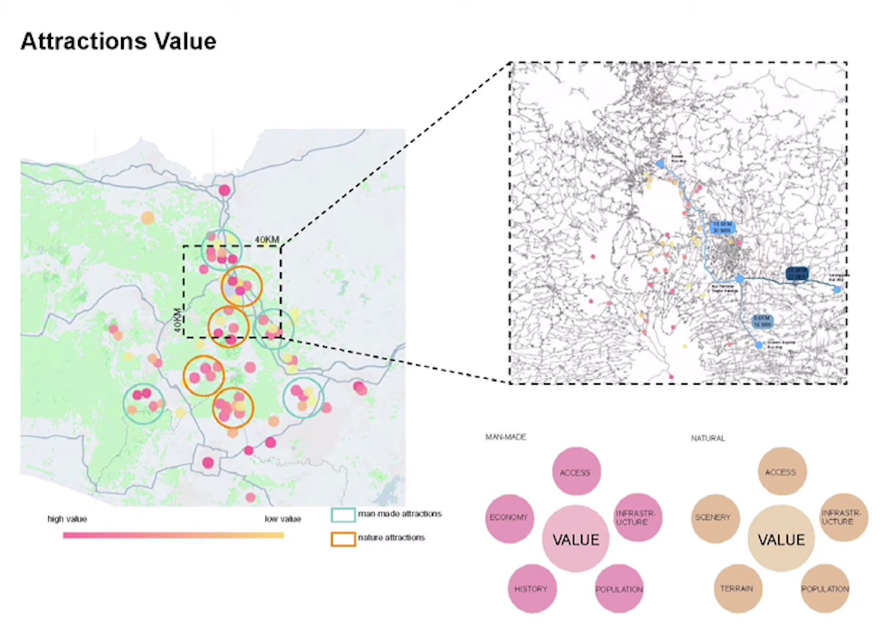We research tourist places in Central Java such as religion, culture, natural places, parks. We separate them into two main aspects, man-made and nature. We also try to define the value of those tourist places. From our research, we predict the development of nature and man-made tourist places in 2045.

We find two transportation vehicles are suitable for low-carbon green travel: sightseeing electricity vehicle bus, and second is scooter. For this project, we will mainly focus on the sightseeing bus because it's a green carbon subsidy program.

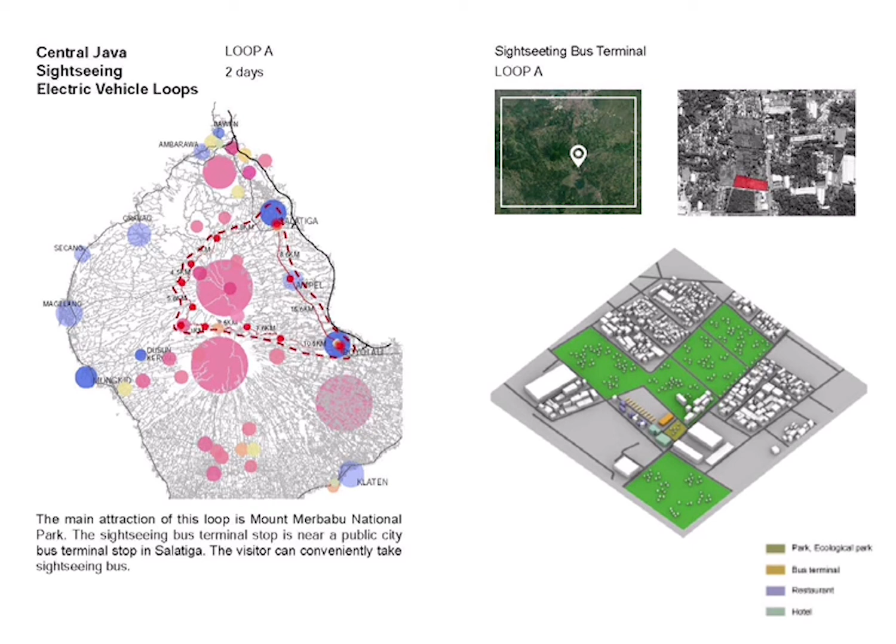Bus loop design is important for our work. Those 8 loops connect the different tourist places and city. It shows how much time visitors will spend in these loops and how popular these loops are. The reason to design these loops is to disperse tourists, drive economic development to other places, and also bring convenience to tourists. We don't want to add more routes because Central Java has a good road system, which also provides a good condition for our loops.

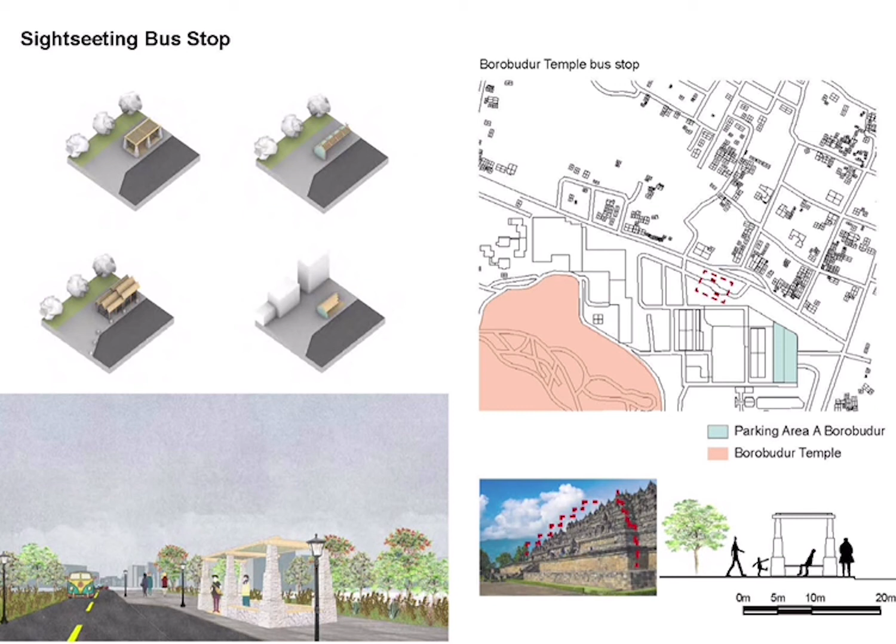We design different service functional hubs to create better travel routes. These hubs can be placed near the bus stop to provide more traveling service and to promote the development of the loops. For the sightseeing bus hub, we designed the facade element of our bus stop by extracting some features of nearby attractions.

Welcome to Java Studio. This studio focuses on understanding the urban and rural systems of Central Java and its rapid urbanization. Central Java is called a genius loci. It is an island of extremes. The three major sectors contributing to Central Java's economy are manufacturing, agriculture, and tourism.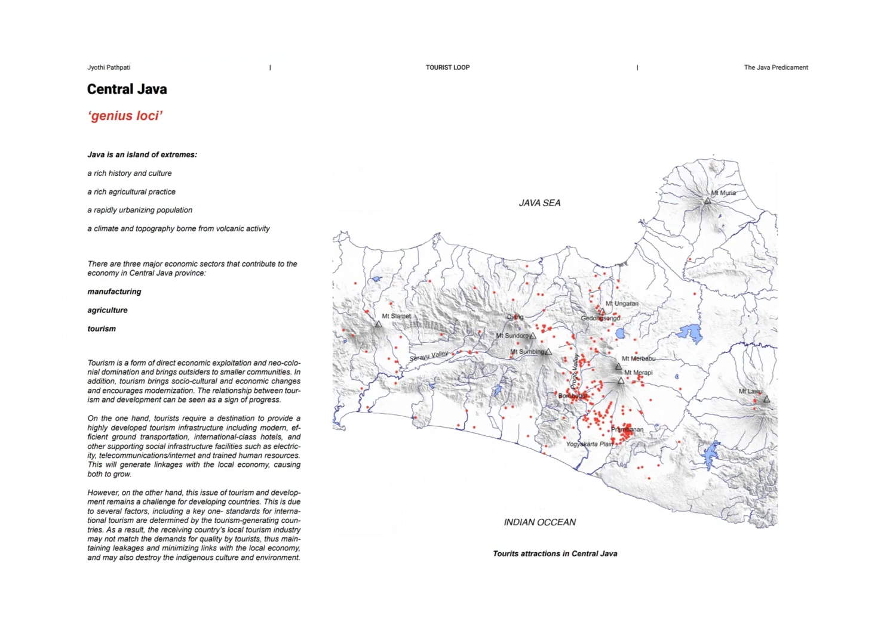There are several tourist attractions in this region. My hunch for Central Java's future urbanization is using tourism to boost the rural economy, since there are many significant tourist attractions located in rural areas. I considered a tourist loop where a tourist departs to a specific destination while visiting some amenities in between and returns, completing this loop. In Central Java's case, most of the tourist amenities are located in major cities.

Yogyakarta and Semarang serve as supporting cities for tourists. More than 90% of tourist amenities and services are located in these cities. A tourist spends more than 60 minutes to reach a major tourist place and does not find time to visit other attractions. What if these amenities come up in rural regions? What could a tourist do in the same time traveling from city to rural region? How will this benefit the rural economy?

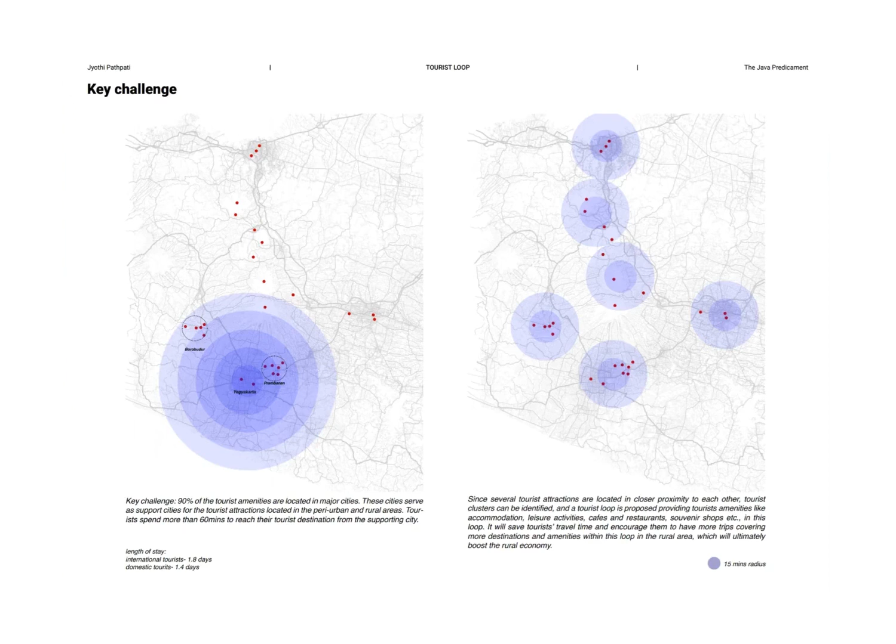The percentage of GDP contributed by the tourism sector was 10% in 2019, which decreased to 6% in 2020 due to the global pandemic. The projected GDP for 2045 is 12%, almost twice last year. Domestic and international tourists both contribute to this.

The selected sites are Borobudur Temple and Prambanan Temple, as they are very popular and listed as World Heritage Sites, and attract the highest number of visitors. One more essential factor is that there are several other attractions around these sites which can be incorporated in the loop. The growth pattern around these sites is fragmented. The land use matrix shows 50% agricultural land and 50% settlement.

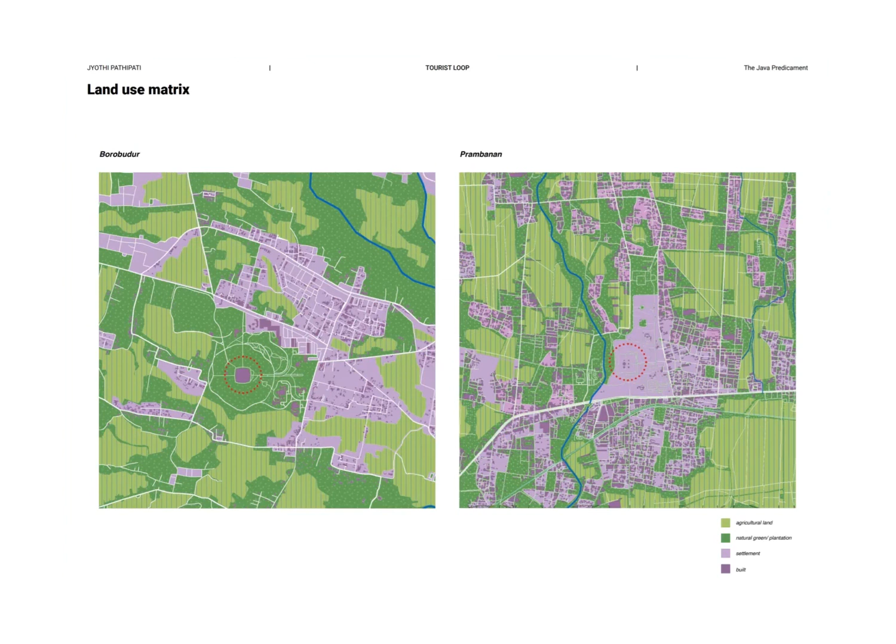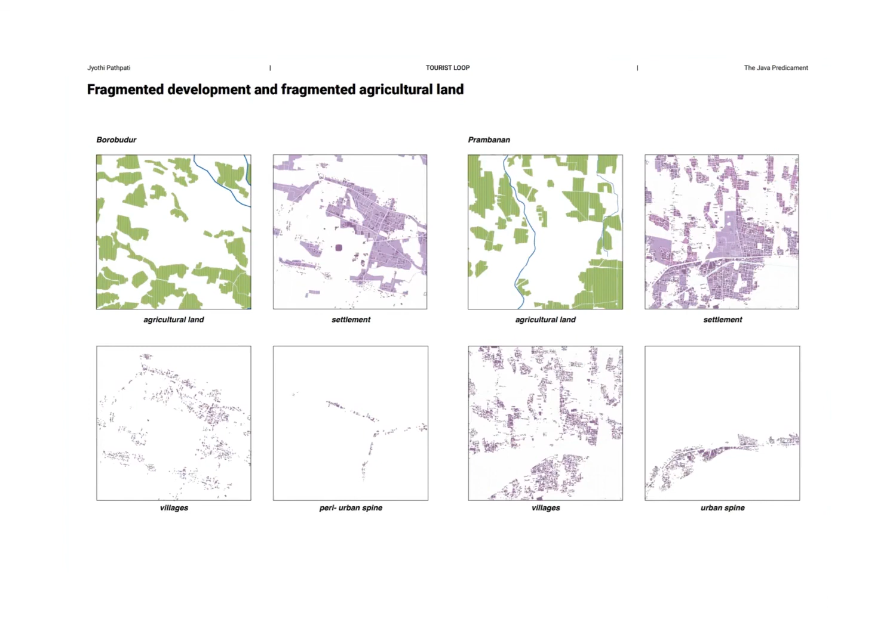Borobudur Temple is in a rural context, whereas Prambanan Temple is in a peri-urban settlement. The fragmented development led to a fragmented agricultural land pattern. These pieces of agricultural land could be pockets for the development of tourism-related amenities like accommodation, cafes, restaurants, leisure activities, souvenir shops, and more, which will serve the needs of tourists. This will create a tourist loop in the rural region and generate more economy towards the local communities compared to the income generated from fragmented agricultural land.

All sorts of cities compete for tourism, including those that have remained economically healthy and vibrant at the core. In such context, the infrastructure of tourism should be merged into the local spatial and cultural fabric rather than clustered into well-defined urban space. A measure of prosperity for a sub-district region is the number of settlements classified as urban or rural. The pressure to preserve the rural character is contrary to the desire to produce greater economic wealth.

As tourism grows, there will be a gradual conversion of agricultural land to non-agricultural use. This fundamental characteristic can be considered to develop tourism-related infrastructure, and as tourism advances, additional opportunities will be created for employment, investment, development, and infrastructure spending, which ultimately heightens rural development. Thank you.

Urban resilience has conventionally been defined as the measurable ability of any urban system, with its inhabitants, to maintain continuity through all the shocks and stresses while positively adapting to transform towards sustainability.

The Semarang city has experienced dramatic urban growth in the past 20 years. As a result, the population grew. The largest sector involved in Semarang's urbanization is the service sector, particularly the informal fields of activities. Rapid urbanization followed by land conversions at high rates, in addition to the additional developments that occurred from 1972 to 2009, can be attributed to land conversion and other important factors in the growth associated with the population.

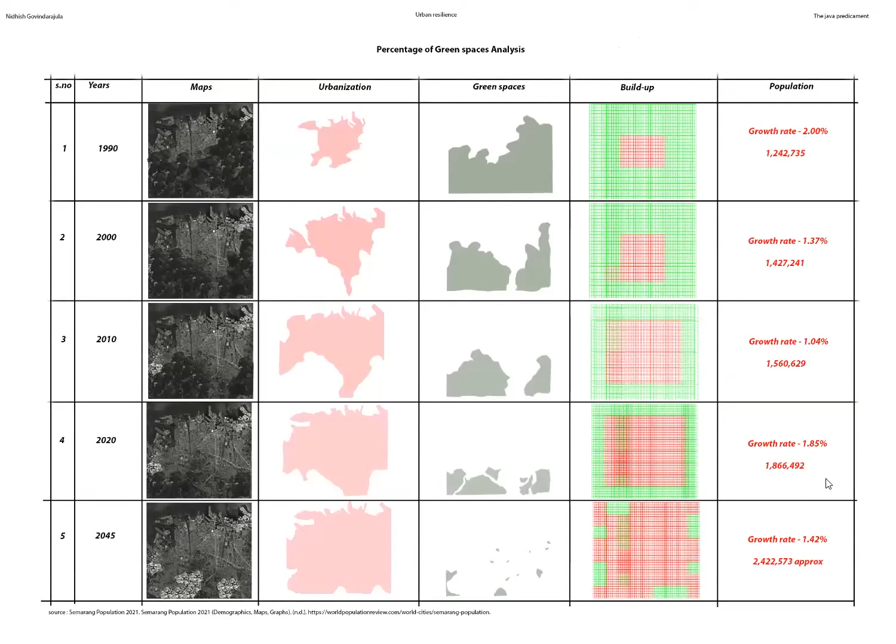It's evident that industries and population have rapidly expanded in a place where there has been rapid urbanization, which has led to built and unbuilt land becoming interchangeable. The direction of metropolitan growth of Semarang is largely uniform, with a predominant eastward expansion.

This is consistent with the prediction that urbanization and industrialization not only lead to economic growth but can also influence the spatial patterns of a space, due to industrialized workers' needs for residential and other supporting facilities.

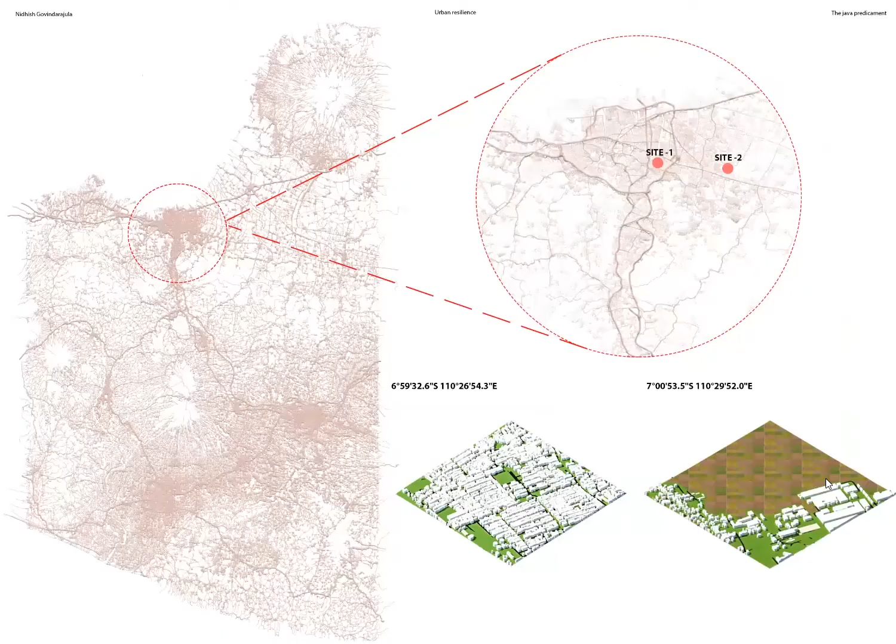There is a decreasing amount of green spaces as the population increases, which changes the way land is used, resulting in the change of land use such that agricultural lands, where Semarang city is developed, become settlements of informal patterns with huge cluster blocks, which leads to natural calamities such as flood. In contrast, the land in Semarang city, a low-lying area, is sinking every year because of settlement development.

Hence, the proposal is to activate the urban pockets left over between urbanized areas, such that these act as a green barrier corridor connecting the areas, which can help control the damage during natural calamities.

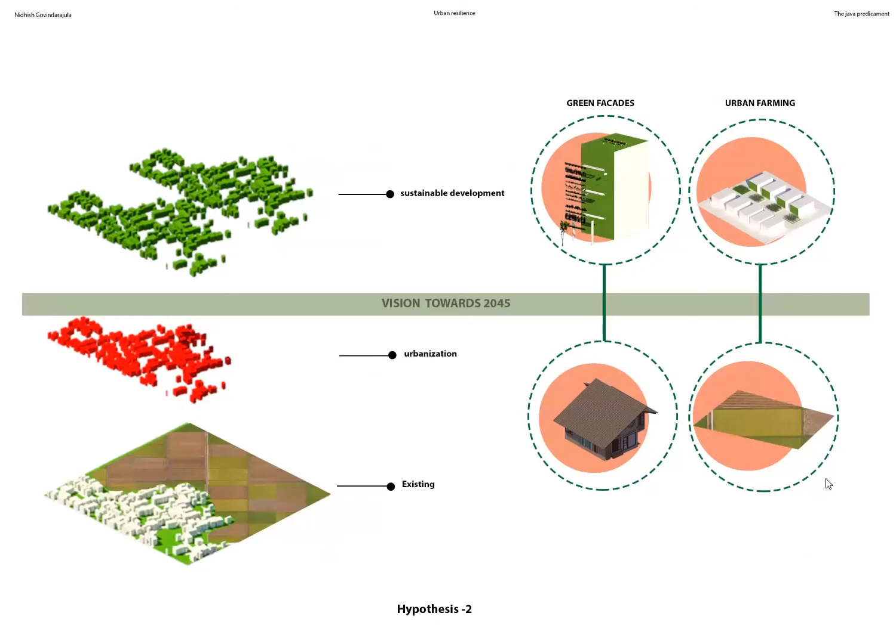The other part is looking at how development is moving towards agricultural land, and the change of land use patterns, which are reducing the agricultural land and green spaces. Hence, the proposal is to implement vertical agricultural patterns and merge this growth with current land use patterns, in a way that allows rapid urbanization to occur without affecting agriculture and forest lands.

My research subject is coastal diversity based on mangroves. So I did a lot of background research about Central Java, a coastal area of Indonesia. The destruction of mangrove here has led to gradual erosion of the coast. Loss of livelihoods and homes of local residents is a problem in the socio-economic development of the coastal areas of Java.

Then I studied the ecosystem of mangroves, which showed that mangroves support rich life as a natural habitat for a variety of species, protect biological diversity, and maintain the ecosystem. It also acts as a buffer against seawater intrusion.

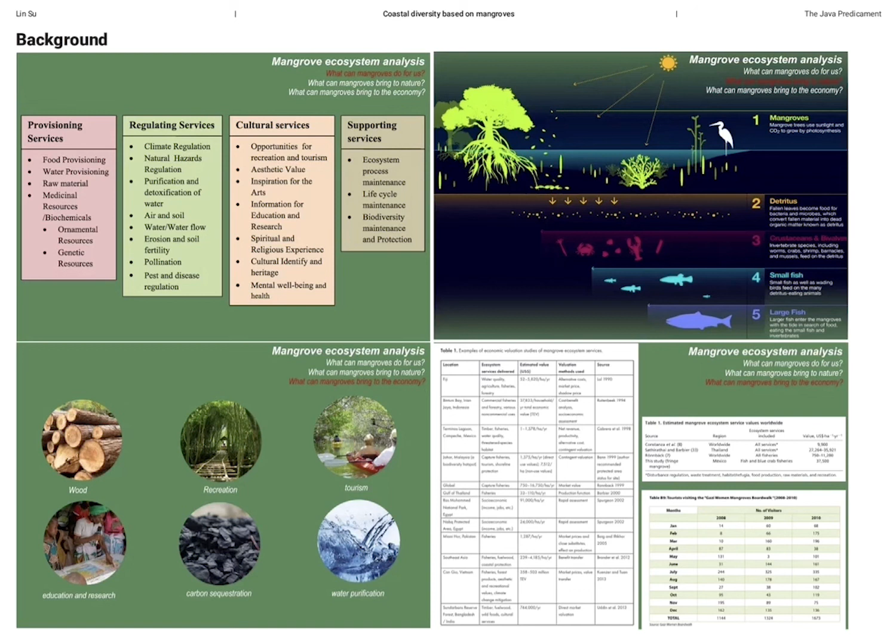The second point is that I learned about the project measures taken by the local government to restore the mangrove, developing a natural defense that will protect the hinterland from further erosion, where the coastline has not yet been eroded.

This is a famous mangrove tourist area in Java, distributed along the north coast of Java. Semarang city has many tourist attractions and has the largest airport by the sea and a rich transportation network, which will greatly promote mangrove ecotourism. So I took the city's coastline as my research site.

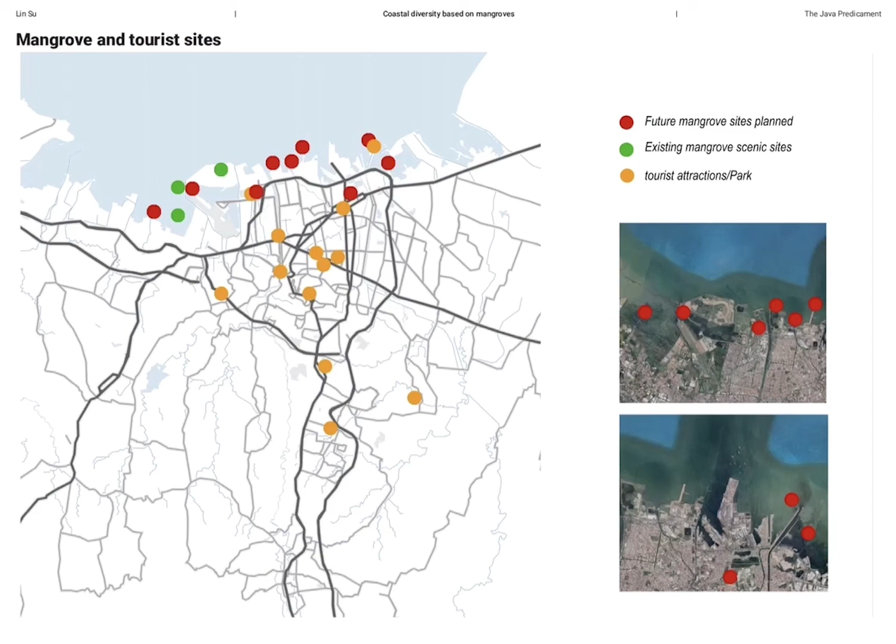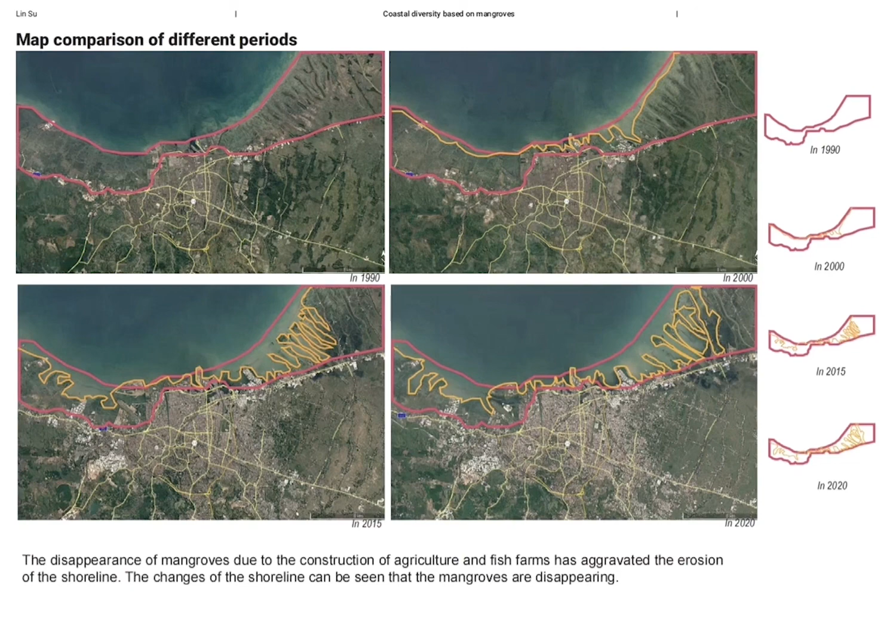So we can see the coastline change, and what we have to do is restore the lost land and redefine the new coastline, giving it a new function based on the local land use.

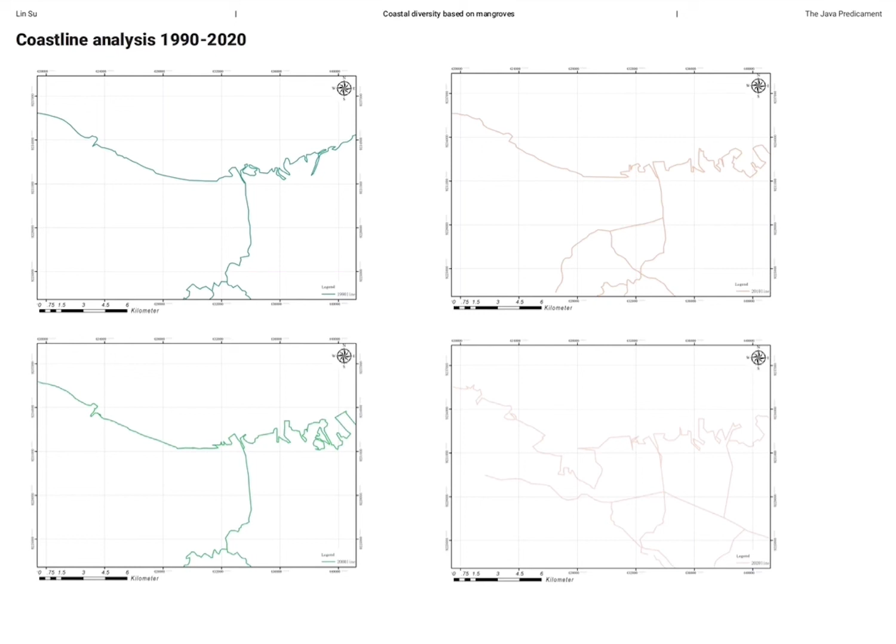So when the coastline is extracted, we can see more clearly the beautiful coastline created by nature and humans. Now, based on the coastline, the boundary of the city is used to build connections, with the main purpose of restoring the land and making a new function buffer zone based on the mangrove forest.

So we can see the various spaces of this coastline, including mangrove, underwater plants, a marine exhibition hall, mangrove tree stack trail, holiday village, tree house hotel, kitchen farmer, cycling sea lines, ecological fishing village, ecological park, museums, and so on.

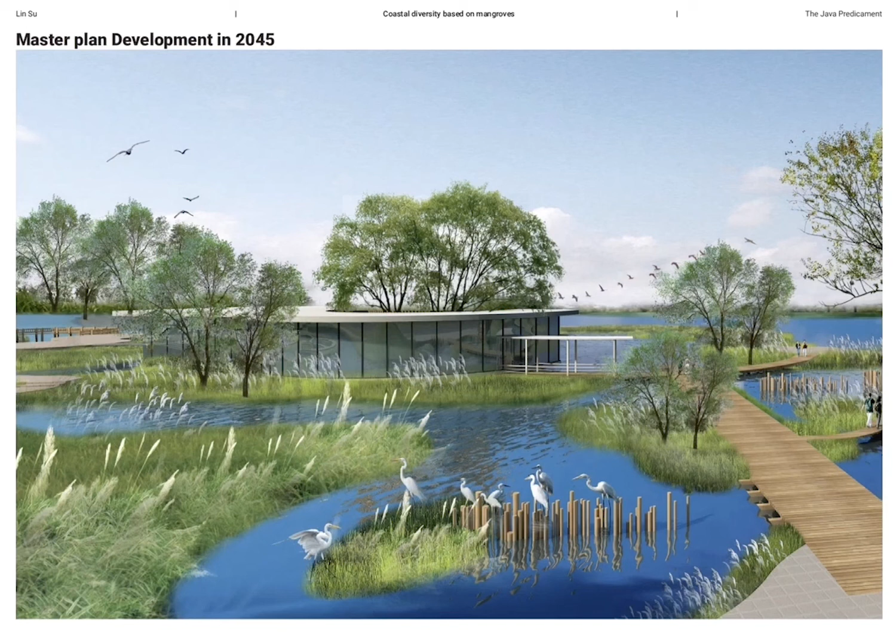Also, there are other amenities along the coastline, as shown in the reference picture: the seaside biking line and pedestrian walkway, ecological park, and so on.